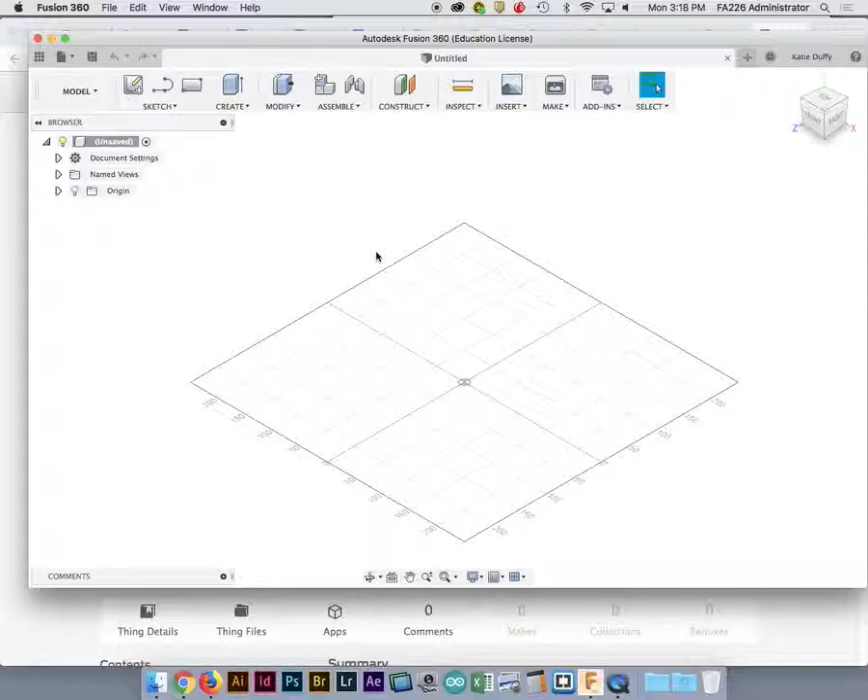So I think what I'm going to do is start off by making a box, and then I'm going to hollow it out. I'll start by making one solid box and using a plane cut to split it, just so I can show you all how to do that skill as well, okay?

So I'm just gonna go ahead and grab a box, all right? The only difference about yours is it's just gonna be a more elaborate shape, but then you're just gonna find a plane to put that hinge on. So I'm just gonna make mine, let's say like 100 millimeter by 100 by 100 for now, just to keep it easy.

Okay, and I'm going to change the material real quick, the appearance, just so I can see what I'm doing a little bit better. I usually will work with plastics. I don't like that one. Let's see. I don't like that. Opaque, that's what I want.

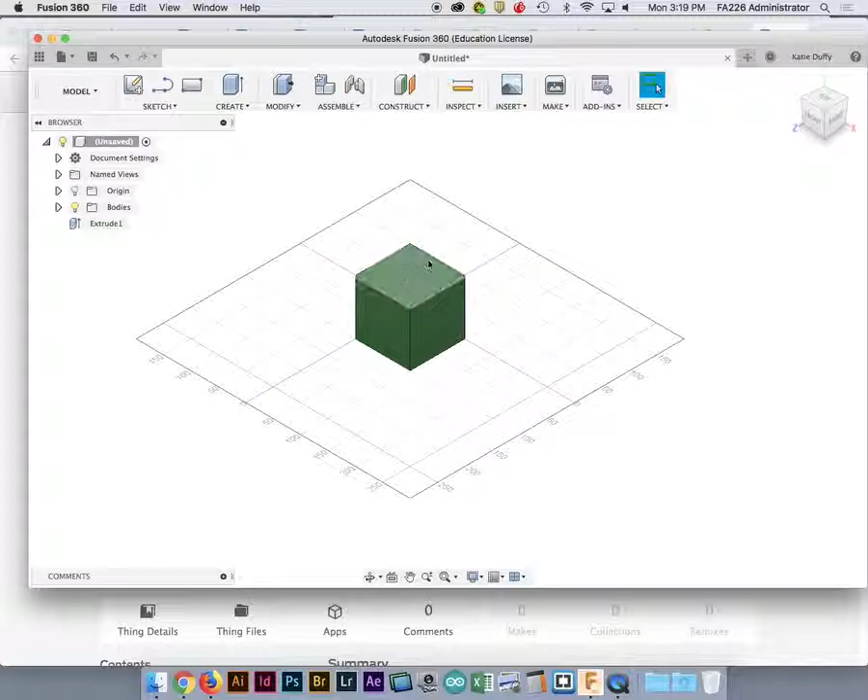Okay, cool. So instead of drawing another box that has the same X and Y dimensions and just a different Z, the other thing that I can do to show y'all this skill as well is I can actually use one of these planes to chop my form in half.

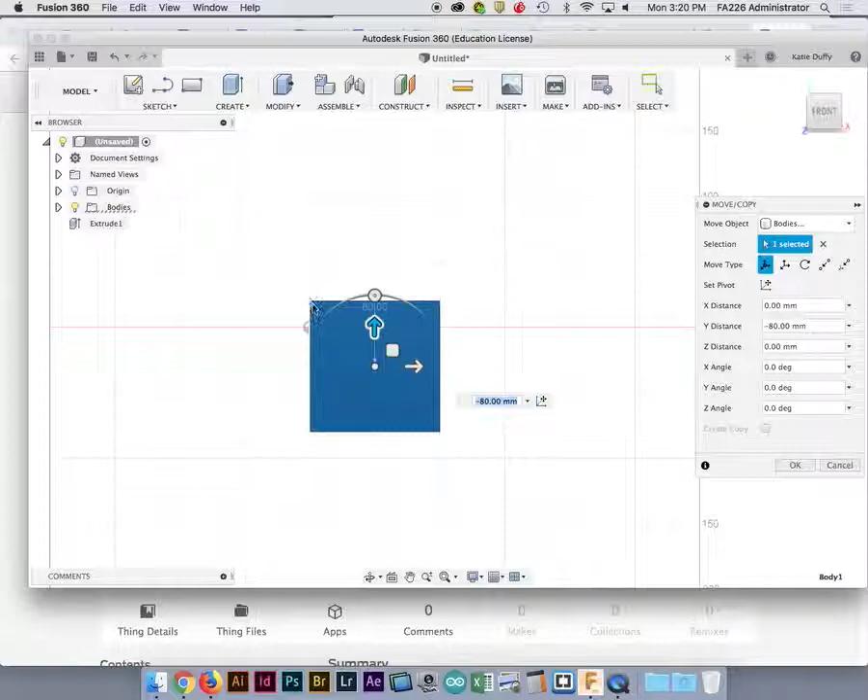So I'm going to use my move copy, and I'm just going to move this. This red line is going to be the X plane, okay? I'm going to move this down a bit so that I have about 20 millimeters from the plane to the top. So that means my top's going to be 20 millimeters. So I'll hit return and go back home. As you can see, my box is sort of intersecting this plane, okay?

And so what I'm going to do now is actually use that plane to chop this. So I am going to go to modify, and I'm going to go to split body. I'm going to select the body, then select my splitting tool, and select the tool that I want to work with. Unfortunately, I think I have to move this out of the way, so I'll just move this box a little bit out of the way.

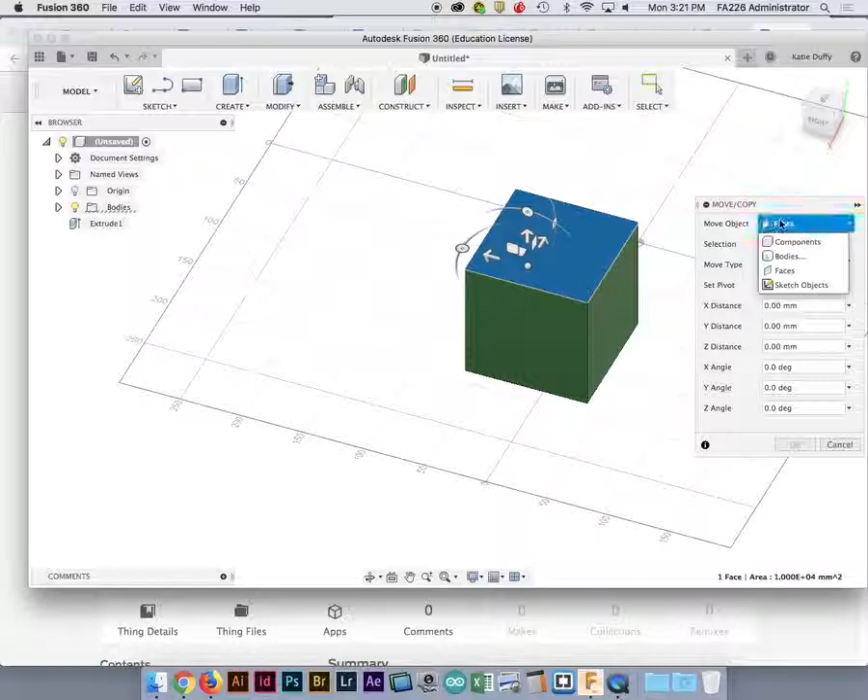All right, cool, so let's try that again. Modify, split body, select the body, grab my splitting tool, select my splitting tool, and check it out—it'll sort of assign a splitting tool right where that plane is. So now when I click OK, now I'm going to have two bodies. All right, so now I have my top and I have my bottom. Does that make sense to everybody?

Okay, so again, same thing—you could totally just draw two rectangles and that would be totally fine. But for y'all's, it might be an irregular shape, and it might be really hard for you to redraw the exact same top and a slightly different bottom. The plane cut will be a really good way for you to find a place to chop it to create a top and a bottom.

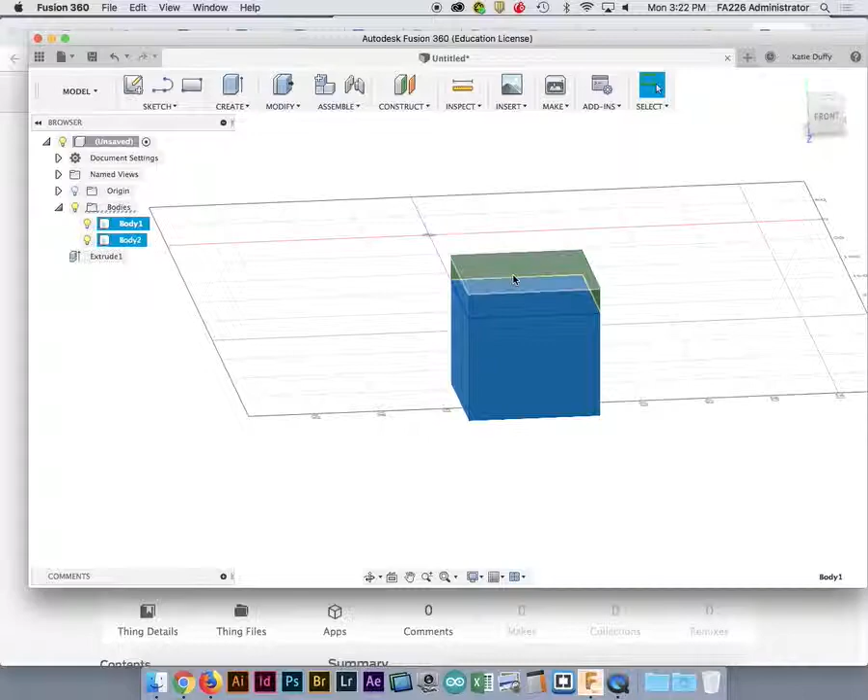So what I'll do now is just move both of them back up 80 millimeters, because I moved it down 80 millimeters before, just so it's sitting flat on the plane and I don't have to worry about it later. The next thing I like to do is start to move things around from the axis that they're going to be moved around in real life space, so I can start to understand how this object is going to interact together.

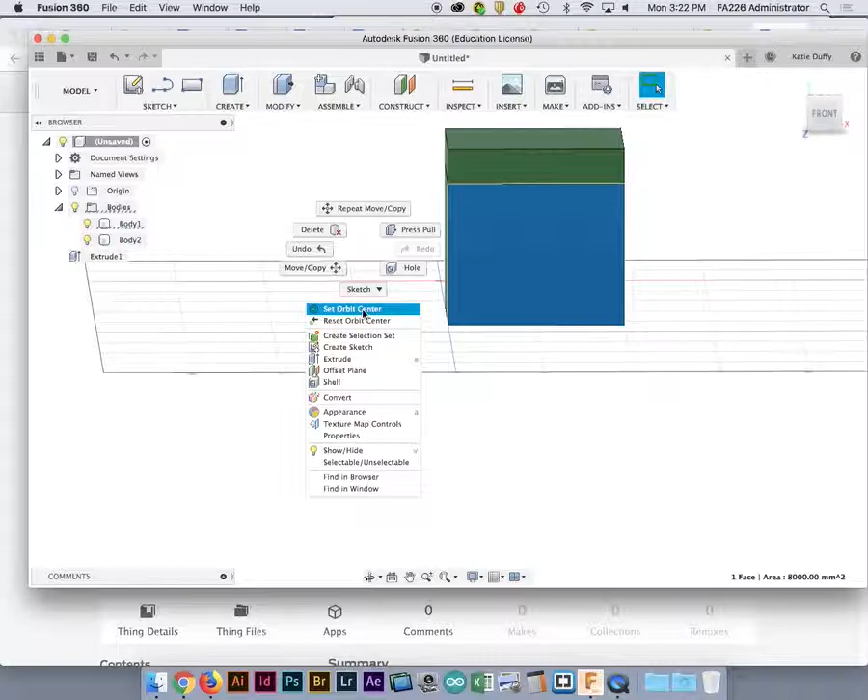Okay, so the way that I'm going to do that is I am going to grab my set orbit center. Remember we went over this? What I'm going to do is this is going to give me my orbit center, and I'm going to put it right at the corner of this top shape.

Okay, so that's going to be my orbit center now. So now when I move things around, it'll move around based on this. So the first thing I'll do is rotate this top just so I can understand exactly how things are going to be rotating.

Because you want to make sure that when you're rotating something, there's not a piece that gets in the way of it. If you have like a little piece sticking out here, it's not going to be able to flop all the way open.

So just to make sure we understand the basic mechanics, I'm going to go to Move Copy, and I'll grab my body. But what I'm going to do is make sure I select that corner, or better yet, this whole line here. Either one will totally work.

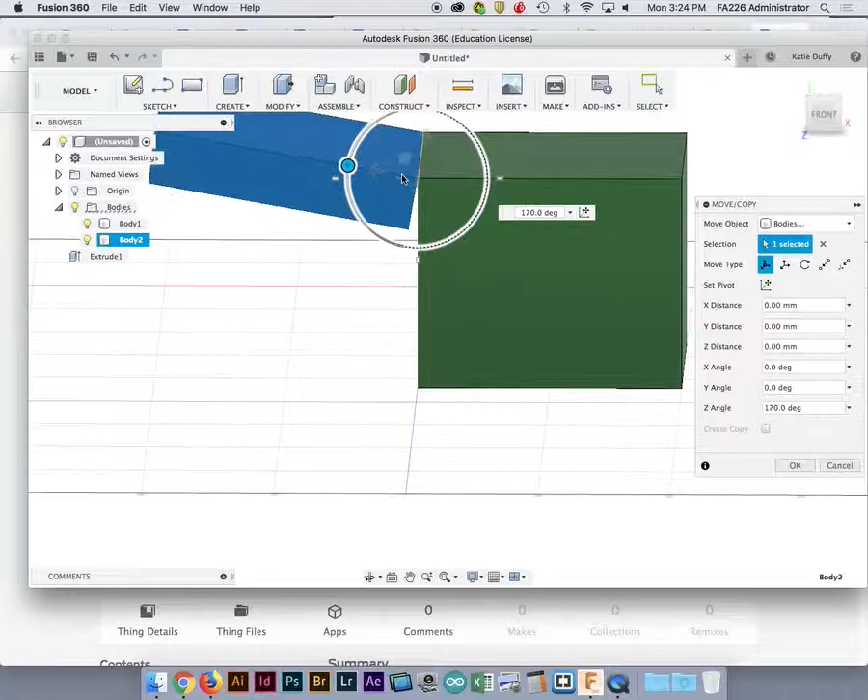So I'm going to select the corner of the top. And then when I move it around, I'll actually be able to see exactly how it's going to be rotating. So when I rotate it, it's going to be rotating from this axis, and it'll only be able to rotate 180 degrees, because if I go any farther than that, it's going to start to intersect the other space.

So let's say you want it to rotate, but you want it to flop all the way open for some reason, or you want it to flop open farther than 180. What can I do to this top to make it do that?

Yeah, absolutely. So I can go ahead and grab my fillet or chamfer, either one would work, and just pull this in a bit.

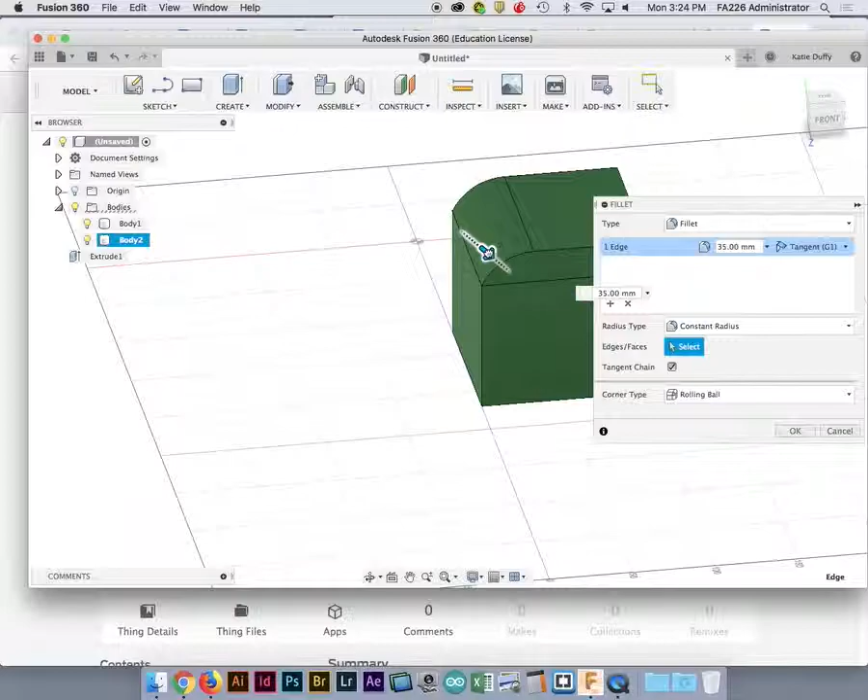And so then when I rotate it, and I can hide this real quick just so I can see a little better, then when I rotate this, I'll be able to go a little bit more. See that?

Everybody following me? Okay, so that's just your test, especially when you get to the point where you actually have the joint. You don't want to print until you've kind of moved things around and made sure they stay where they're supposed to go, and that anytime you get to a point where one body is sort of intersecting another body, just know that you can't do that in the IRL space, because we're going to be working with solid matter and not just math.

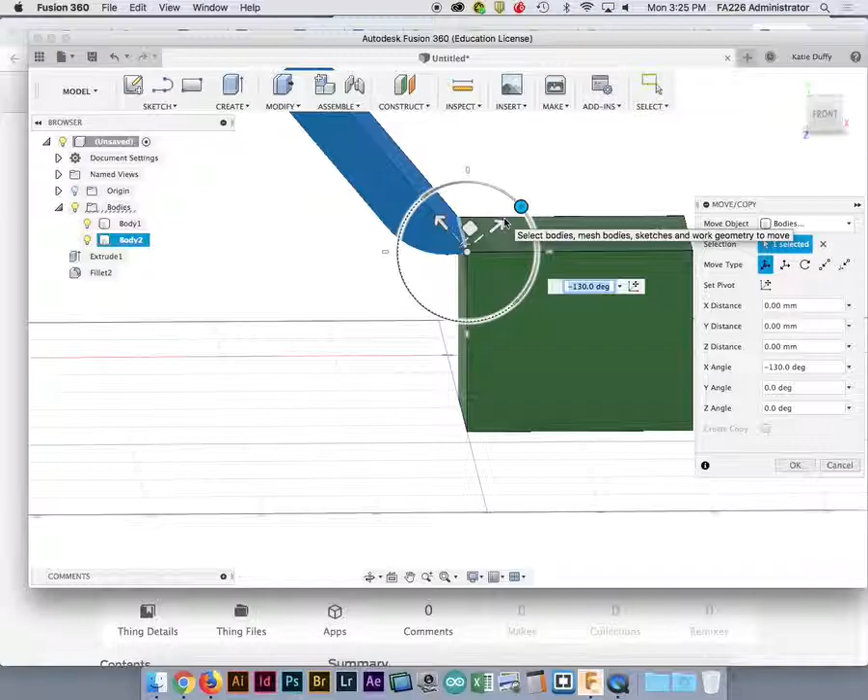Okay, so that's the first step, and I always like to do that. I'll just literally be in the computer and watch this move, just to try to understand the mechanics of it so that I can make a joint that will behave correctly with those really simple mechanics. Does that make sense to everyone?

All right, so I'm going to cancel this. This is going to be our main shape. So now what I'll do is I'll actually start to make the joint.

You could use the chamfer to start off with, or it might be a better idea to just maybe start off flat. I think for this tutorial I'll actually just start off here, and then I'll sort of change it as I go. So I know that I'm going to need to make a joint that sits off the back here.

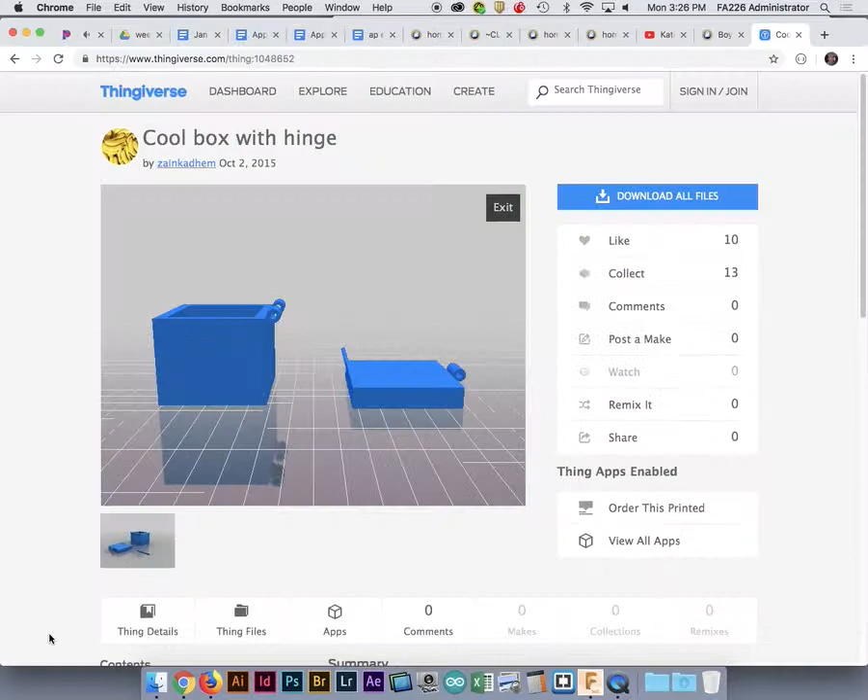So the first thing that I'm going to do is make a cylinder, and place it in between these two shapes. And before I do that, let's just take a look at the way that this is formulated, just one more time.

Okay, so if we take a look at this, notice how this kind of sits off just slightly, just a little bit off the back. It's not just totally connected to the back, it's just a little bit off. So we're going to do a similar thing. We'll make that piece first, and then we'll make everything kind of fit together.

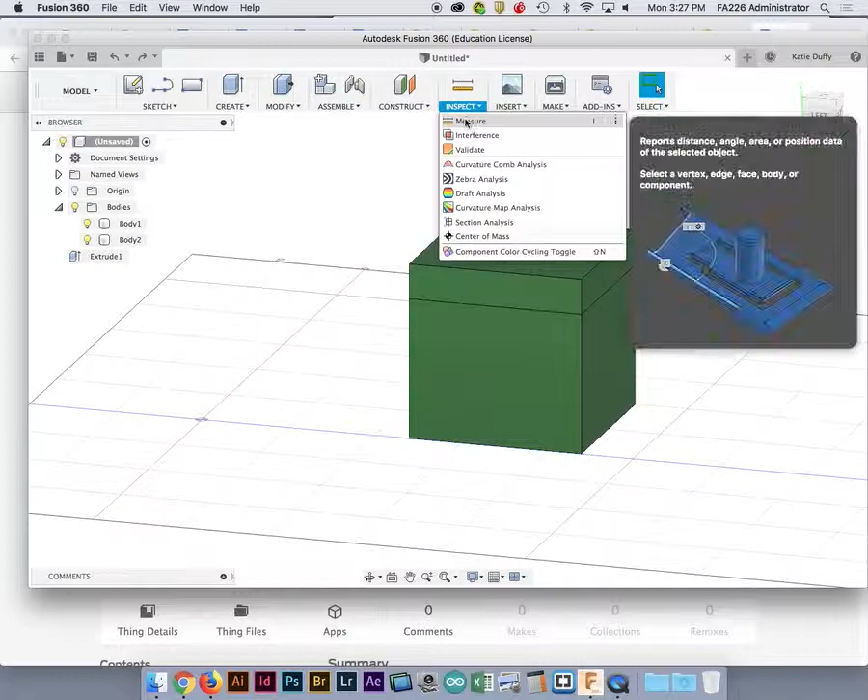So I'll go ahead and grab a cylinder. And before I do that, I'm just going to measure the size of this box because I don't remember what size it was. So I'll just go from here to here. All right, so 100 millimeters, I don't know why I couldn't remember that. So we'll do a cylinder.

And I'm going to make it... let's make it like 6 millimeters, actually let's make it a little wider, let's make it like 10. And we'll make it 100 millimeters tall. Okay, and then I'm going to change the appearance of this just so I can see what I'm doing a little better.

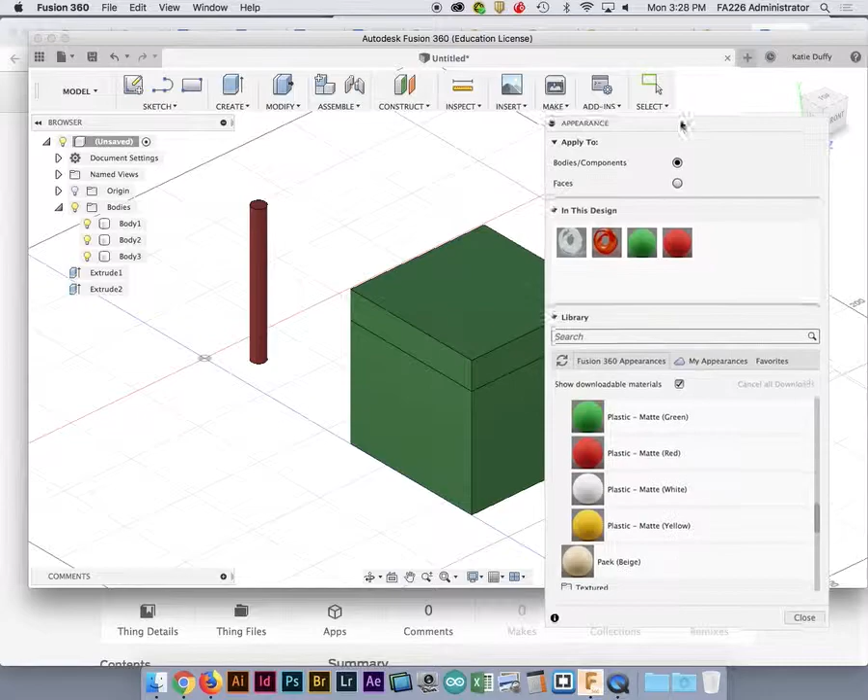Okay, I'm just gonna rotate this. Make sure it's on bodies. Okay, I'm just gonna get it mostly into position here.

I'm actually gonna do that again, because I want to make sure it's at a right angle before I start to rotate it. See how that's kind of wonky? It's not at the same right angle as the X, Y, Z axis.

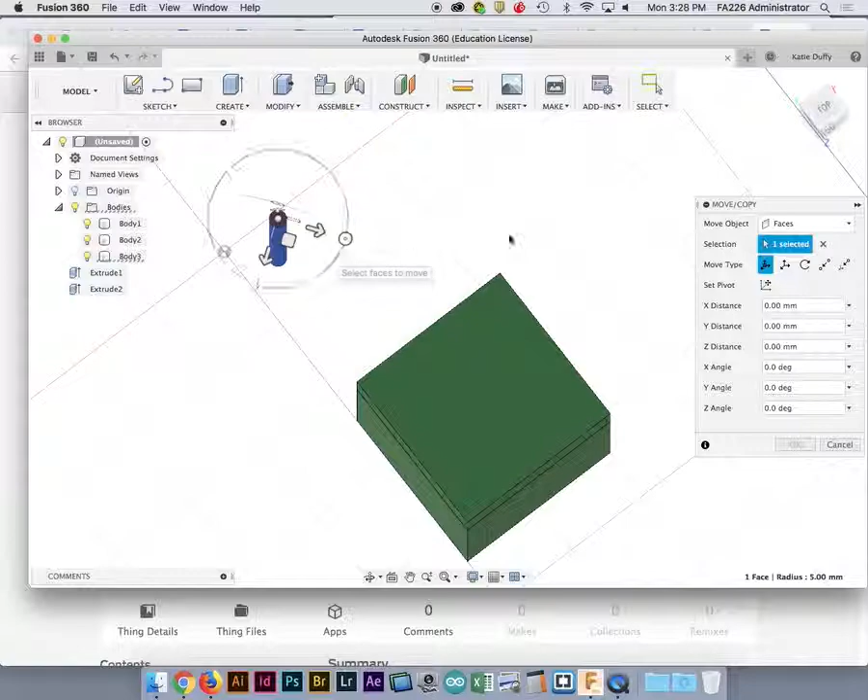So yeah, there we go. That's much better, that looks right. So I'll rotate this again, go 90 here, and then I'll just drag it into place. I'll go from the top.

Okay, and it doesn't have to be perfect because I'm probably not going to end up using the whole thing anyways. I'm probably just going to only use little pieces of it, and we can always align it later.

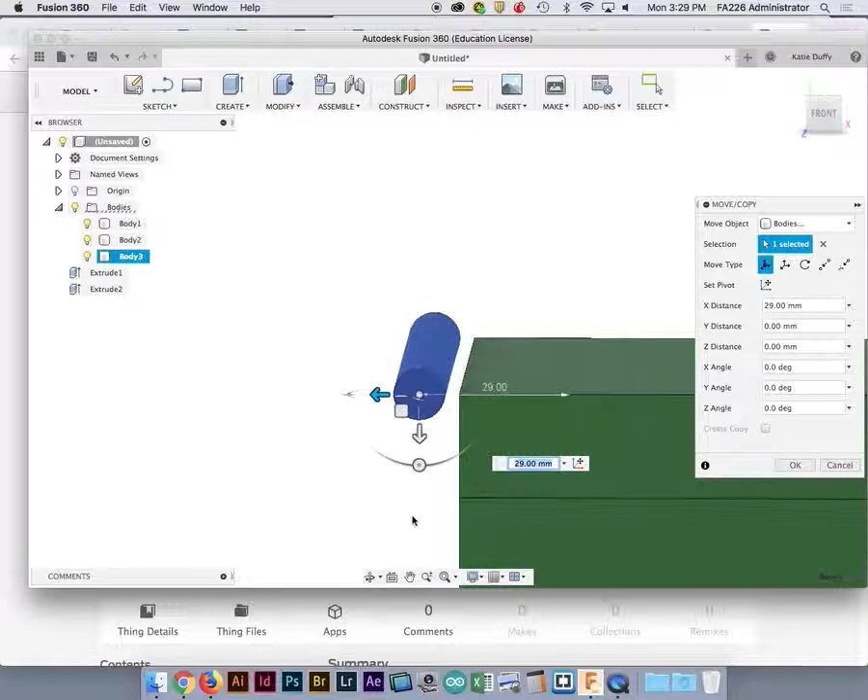So I'll put this here, and I'm going to offset it from the box just a little bit, maybe even a little less than this, just so I can have that little bit of space. I'm going to put it right in between the two pieces. I may need to adjust this later, but I think this is a really great place to start.

Okay, so we know that we're going to need a hole in here, right? Does anybody remember what size you should make your walls? Yeah, 3 millimeters. You might be able to get away with like 2 millimeters sometimes, but 3 is your general - anything you want to be able to hold weight, especially a hinge, should be at least 3 millimeters.

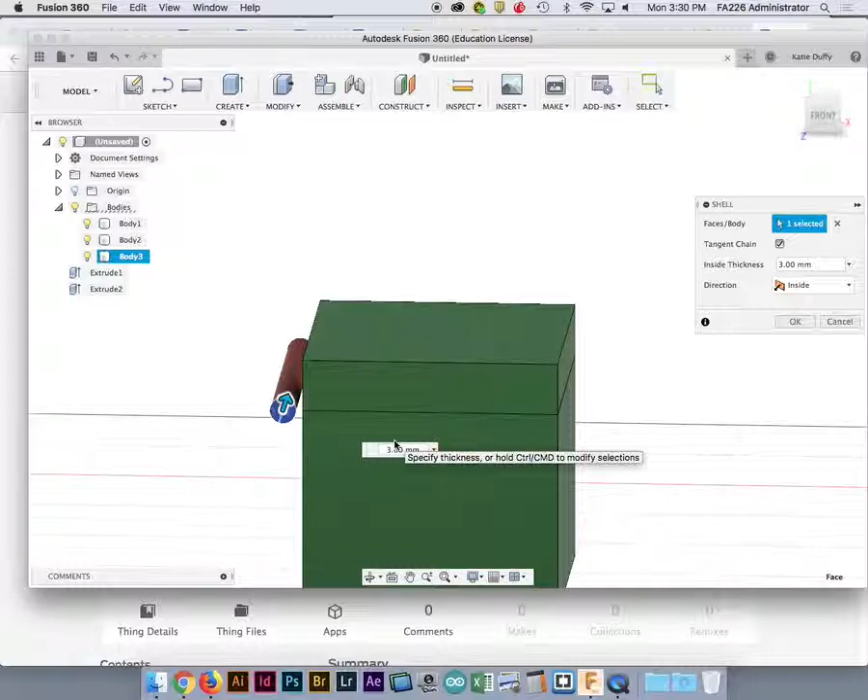So what I'm going to do is go to modify, and I'll use the shell command. Click here, and I'll put 3 millimeters in here. Okay, so that should give me a hole that goes all the way through. Let's try that one more time.

Try the same thing here. Okay, I don't know why this is mad at me. There's another way that we can do this, so we'll just hold off on this for just a minute, okay?

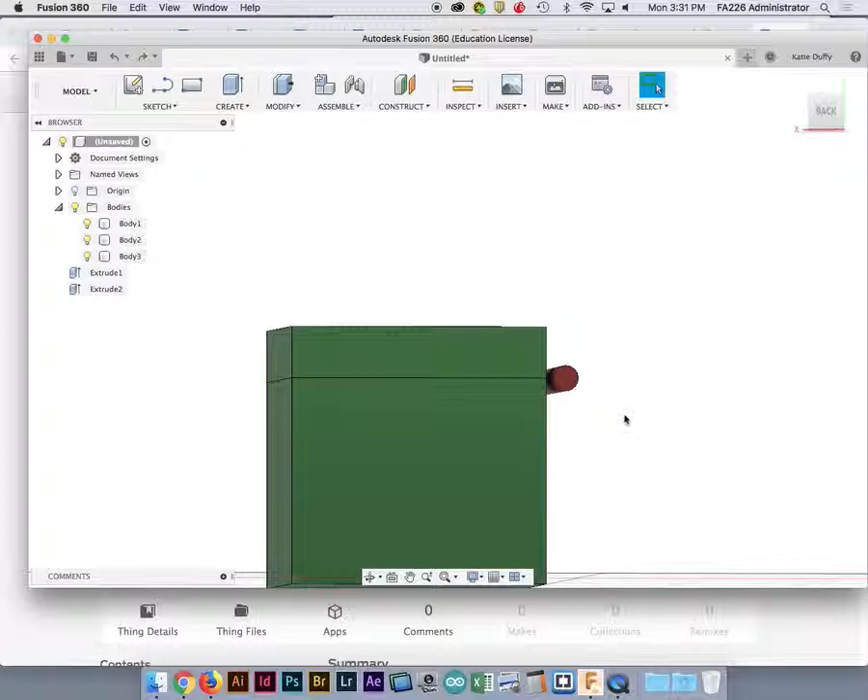So what we're gonna do now is let's go ahead and make the supports that are gonna hold this in place. So I think the first thing we'll do is make a bar, like a little rectangle that goes from the bottom of this shape to this shape. That's just gonna hold it in place. So I'll go ahead and make that now.

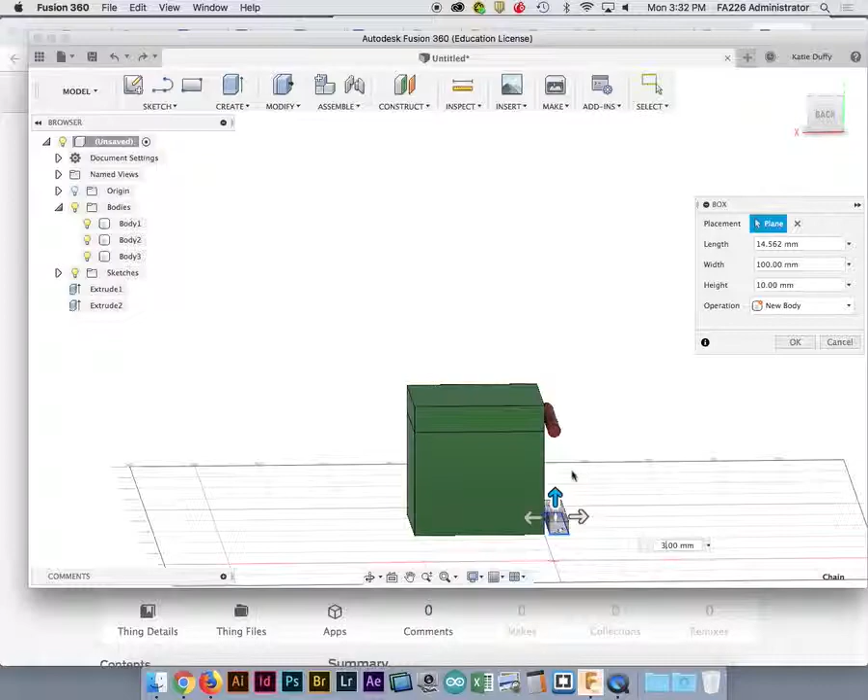So I'll go ahead and grab my box. You can probably use a cylinder if you want to. And I know it's going to be 100 millimeters long. Okay, and I'm going to make it 3 millimeters because I just want it to be a connection piece.

And the width of it doesn't really matter so much because I'm going to put it inside the box anyways. So now what I'll do is move this up to where it's touching the start of my joint.

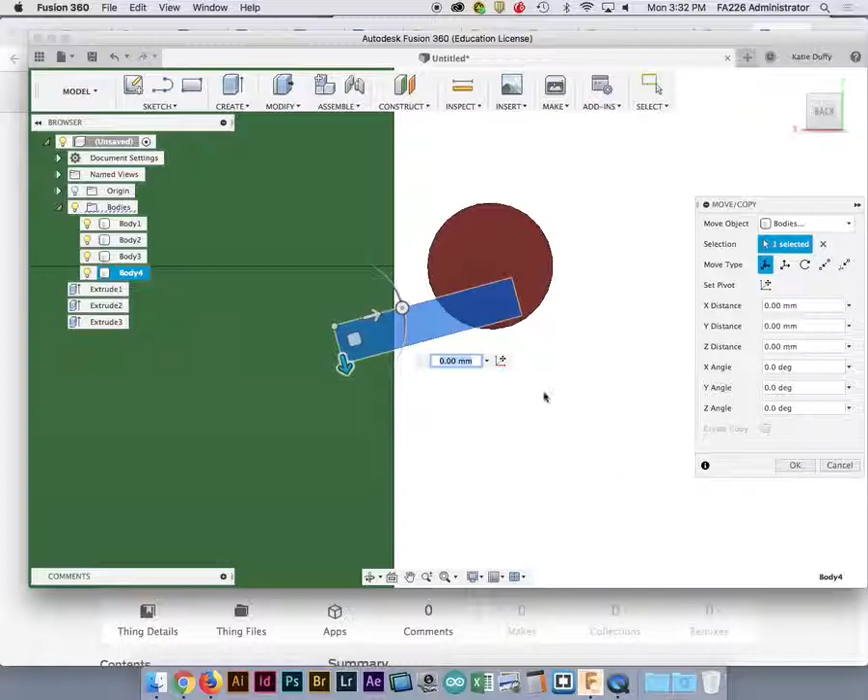And if you want, like the other one that we saw, you could put maybe a little bit of rotation on it if you want to be a fancy person. I encourage you to do so. We'll just move this over a little bit. Okay, cool, so we'll leave that there.

Again, we can adjust all this later. And like I said, we're probably going to use small parts of this, so the alignment doesn't really matter so much right now. Okay, so what we're going to need next is we're going to need to figure out how we're actually going to attach this part to what we have here, okay? And in order to do that, we're gonna need our hole, right?

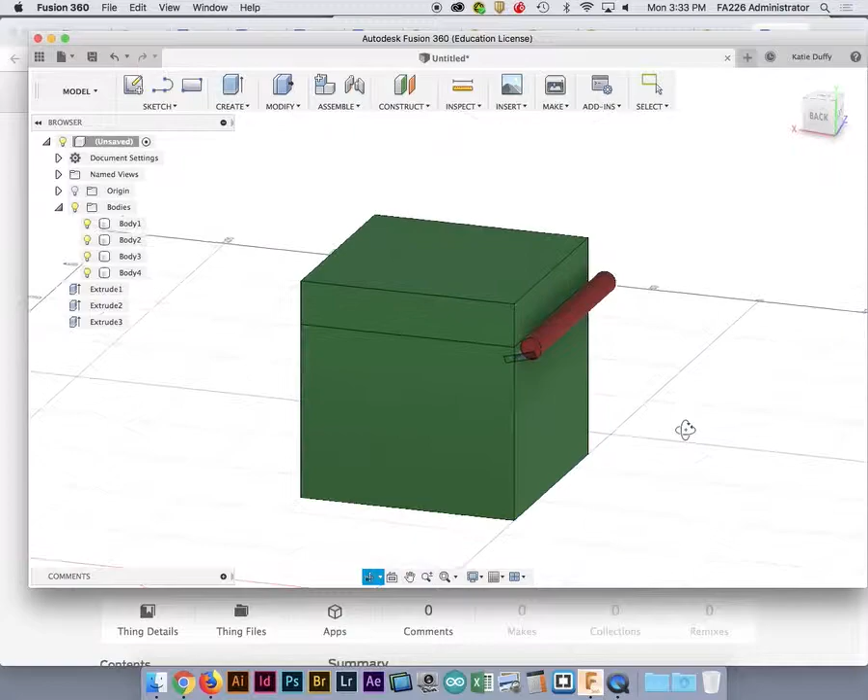So we know we're gonna need a stick, right? We're using that stick approach, y'all remember that, okay? So what we're gonna do first is I'm going to make that stick, that's gonna kind of be like the screw or the pin that you would put through the joint. I'm gonna make that 3 millimeters, and for now I'm going to make it 100 millimeters tall.

Then I'm also going to create another one, and this one I'm going to make 0.5 millimeters bigger, okay? Because I'm going to use this one as a hole. In general, a hole needs to be 1 millimeter bigger than whatever is going into it, okay? So 3 millimeters as a supporting piece, 1 millimeter for a hole. The reason I'm going to make this cylinder 0.5 millimeters bigger is because it's going to expand 0.5 on all sides, meaning it's going to be 1 millimeter bigger. Does that make sense to everybody? Right?

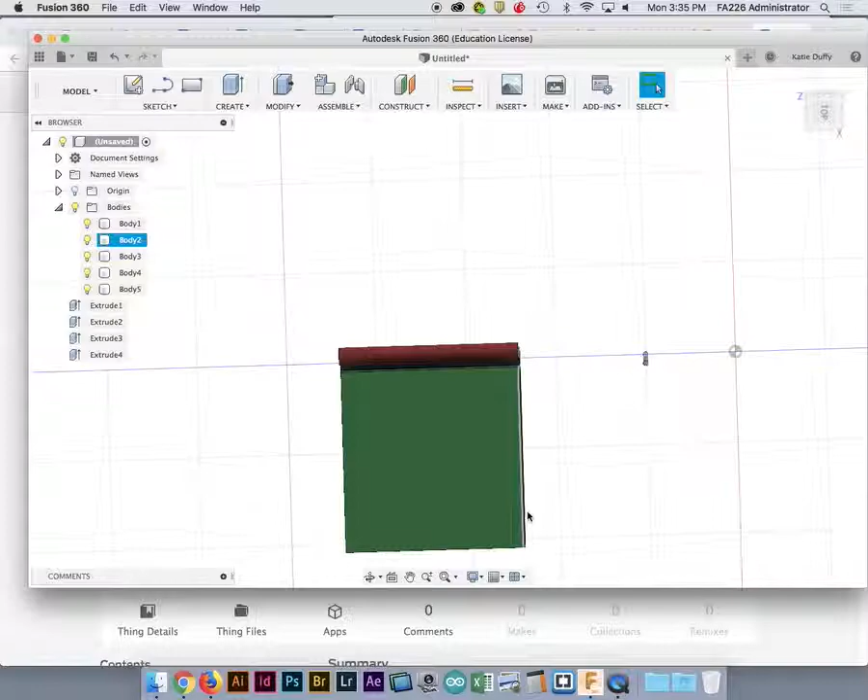When in doubt, if you're like, maybe that's cutting it too close, just do 1 millimeter bigger. It doesn't have to be perfect engineering, because the 3D print is a little forgiving. Keep in mind, if you make something a little too big or too small, we have 3D pens and a lot of sandpaper, so you can always fix mistakes, truly.

So just to simplify this a little bit, let's grab our cylinder again, and let's make it 4 millimeters by 100. This one is what I'm going to use to punch the hole through this joint here.

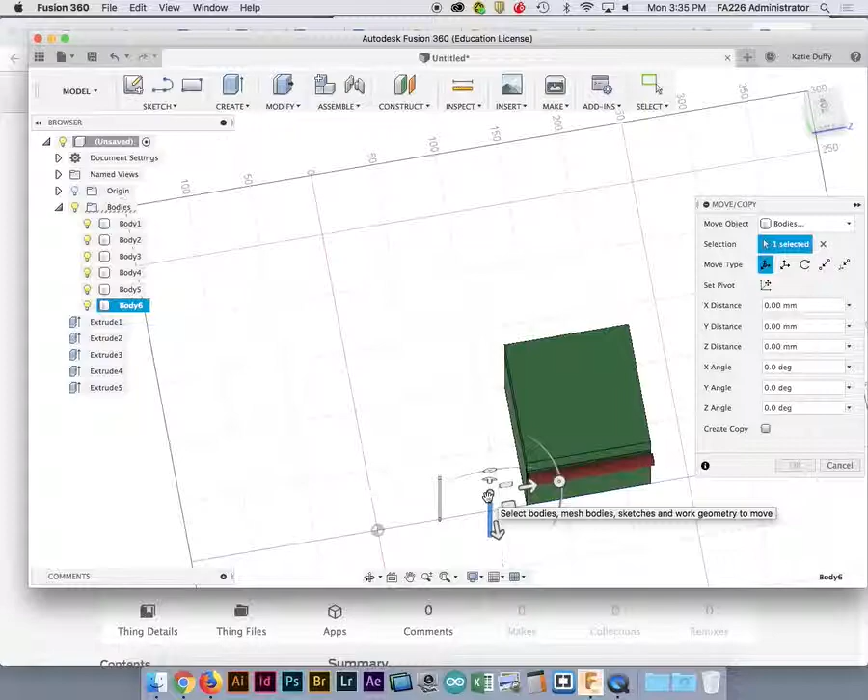So I'm going to go ahead and rotate this. Again, you just want to make sure that the XYZ is at the same orientation of your plane, so that you don't get some kind of wonky rotation, because it's really easy to misrotate something. So, this here, and then I'll move it in place this way, just roughly.

And then for this one, I am going to use my alignment tools. I'm going to go to modify, go to align, and I'll say from the center of this object to the center of this object, and that will align things perfectly for me. So I'll click OK.

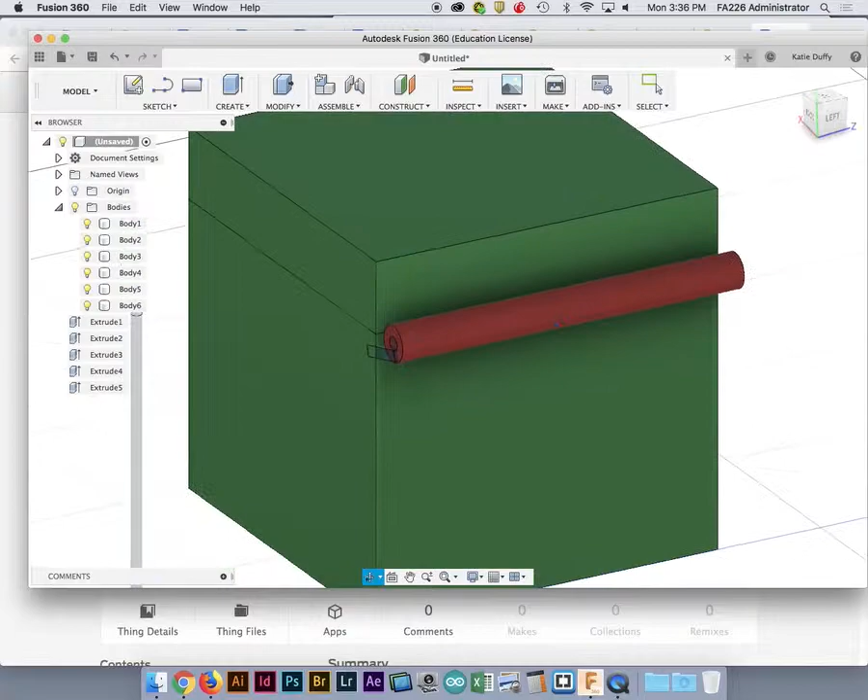Then what I'm going to want to do is come over here, modify, and do combine. Remember, combine has a bunch of different functions inside of it. We're going to use the whole command. If you want to keep your cutting tool, instead of join, do cut, select this, select your tool body, and just say keep tools. So I'll click OK.

What just happened? Did I click a button on this tablet? Oh my god, what is that? What kind of matrix situation am I in right now? Precision mode. I hate it. Oh my god, I'm like a grandma. No shade to grandmas. Oh my god, okay, we made it. Stop, I'm not clicking anything, please stop. I think your wrist is hitting your mouse, or your forearm. Oh my goodness, truly, y'all. I swear I'm not touching anything. I mean, now I am. Okay, Jesus Christ, okay, we made it.

So I'm going to go ahead and find this body that I just created, this Body6 one, and I'll just turn it off for now. So now check it out, I have that hole there, and I'm good to go.

We won't worry about this for right now because obviously I would want to kind of punch the inside of this part out. But let's just wait to make sure that what we're doing is going to connect to everything correctly. Does that make sense to everybody?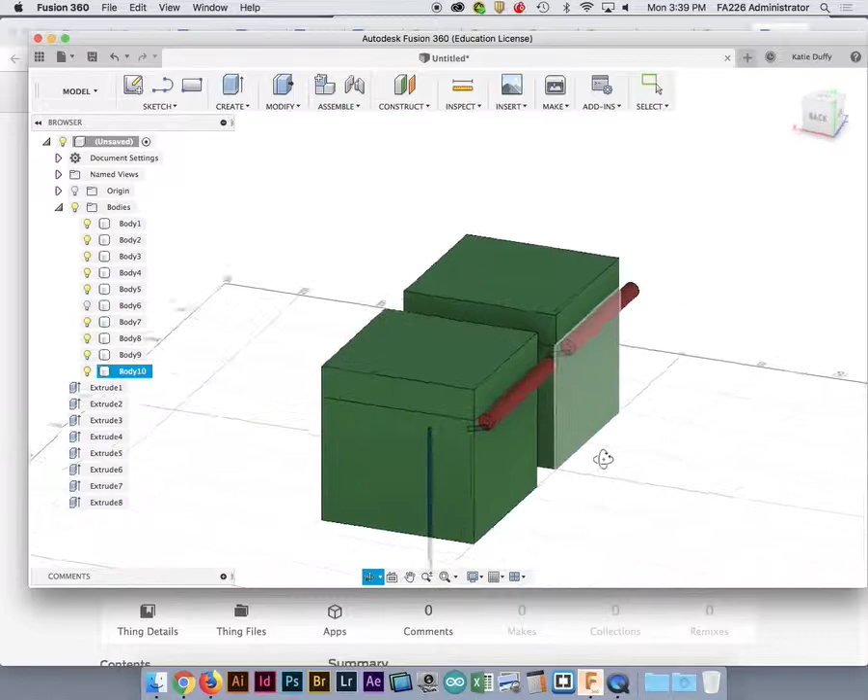So I'm going to move this over here, and this is going to allow me, this one I'll focus on the bottom, and this one I'll focus on the top. So what we want to do now is figure out how we're going to connect the top to this part. We may end up making another copy if we make changes to this, which is totally part of the process.

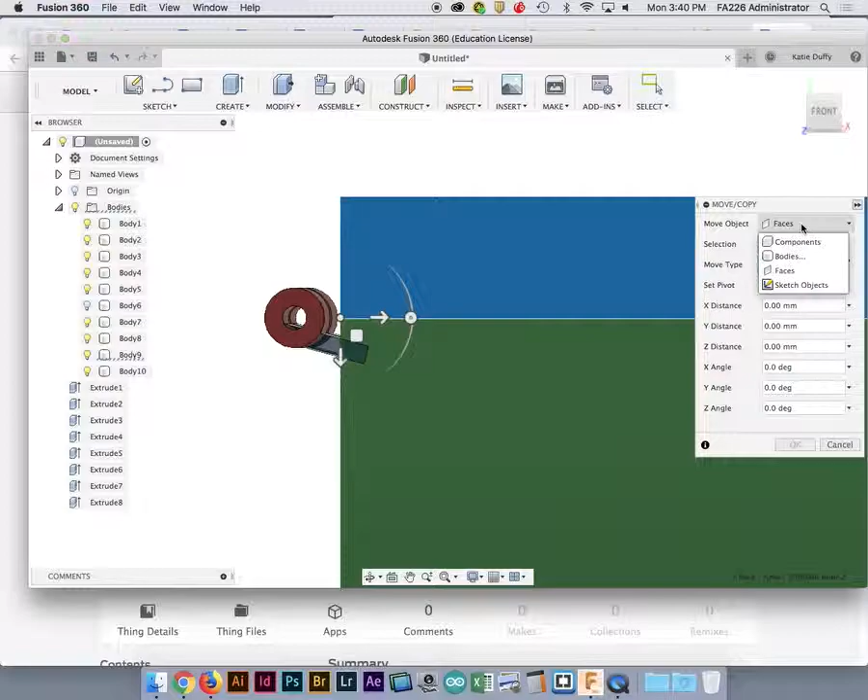So let's go ahead and rotate this one more time and just see how it behaves. I'm just going to grab the corner of this piece and check out how it behaves. Whoops, I want a body, thank you. Okay, so if I keep this where it is, I'm only going to be able to move it this much. So, any suggestions on what I should do?

So if I have this where it's at, and if I have my little joint that comes in here, the only way that I'm going to be able to work with this is it's only going to be able to move this much, right? So does anybody have any suggestions on what I could do?

I can round the bottom. What else can I do? Yeah, I can round the top. I can maybe move this whole thing down.

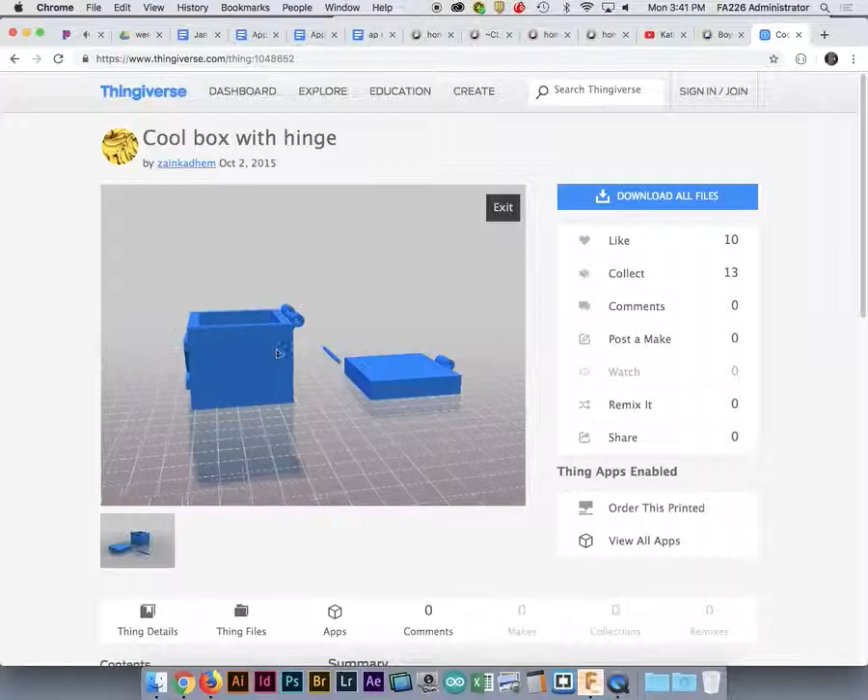But let's take a look at our example over here and see how they're doing it. All right, so what is happening in this example is that they actually have the joint on the top instead of the bottom. See that? So it's rotating from the top, not the bottom. Does that make sense to everybody?

So you can kind of put your joint wherever you want, all right? But if I'm going to try to do it in this iteration right now, I'm going to run into some major problems, right? So let's hit cancel.

And what I'm going to do is I'm going to take these two pieces, I'm going to move them out, and I'm going to move them up, okay?

So I'll grab both of these. I'll do this one first so that I can get the center point, and then this one. I'm going to move it out a little bit, and I'm going to move it up. So I'm going to put this actually right at the corner. Doesn't have to be super perfect, but it should be as close as possible.

And so now what I'm going to do is I'm going to create a connection point for the top. I'm going to hide this stuff here, so I'll hide this whole one. And I can always make another copy, right?

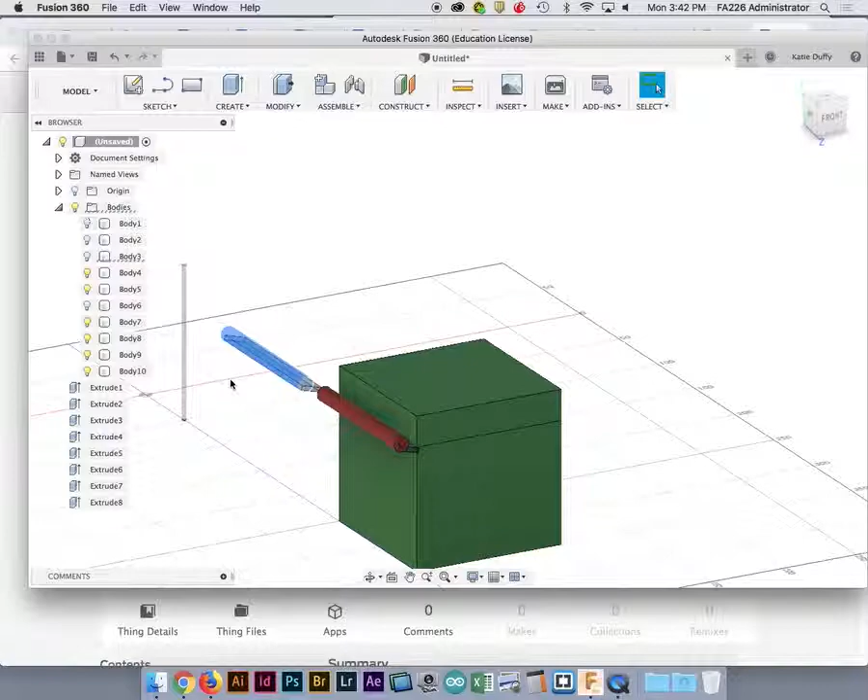Okay, so now what I'll do is I'm going to grab this piece and I'm going to make a copy of it. And I'm going to have this piece connect here, okay? And then what I'll try to do is I'll try to rotate it and see if I can get it to work the way that I want it to work, okay?

So I'll go ahead and do a move copy on this one. And I want to select this body in a way that allows me to... if I select the middle point, see how my direction arrows still say the right angle XYZ, right? Because if I select it here, it's going to go at an angle. So just watch when you're moving things. It's a really important thing to keep in mind.

So I'll do my create copy. I'm going to move this up, and then I'm going to rotate it. I'm going to move it over just a bit. Maybe down just a bit.

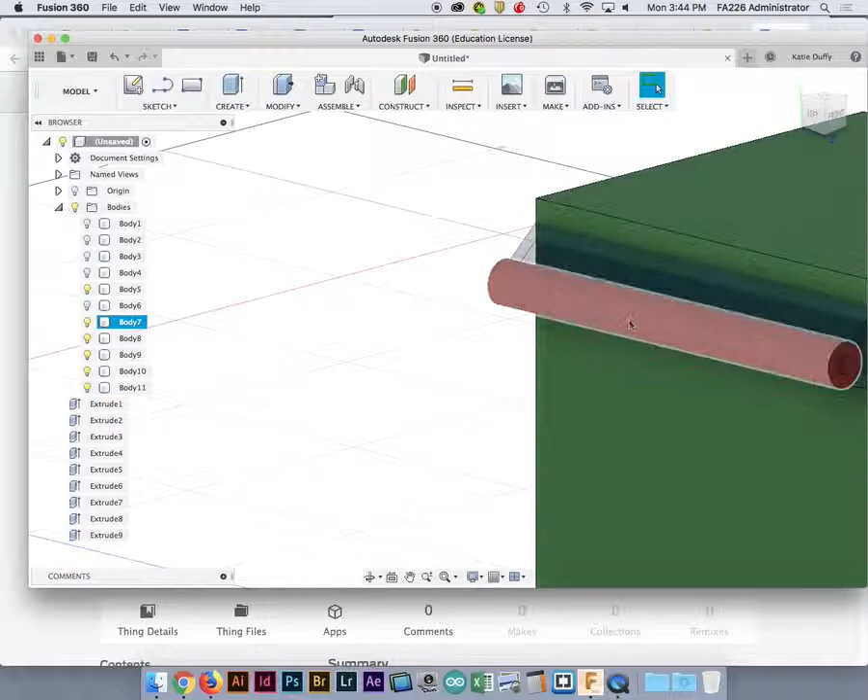All right, so what I'm going to do to this joint is I'm actually going to kind of break it up. So I'm going to cut slices out of it so that one slice will go to the top and two other outside slices will go to the bottom, okay? But before I do that, what I want to test is that everything's going to move the way that I want it to, all right?

So at this point, I'll go ahead and I'll make another copy, and I'm going to put the copy right next to it, and I'm going to move it from this angle so that I can see how it's behaving exactly from this angle, okay? So I'm going to select everything here. We'll do bodies, select everything. And I'm just going to do my move copy.

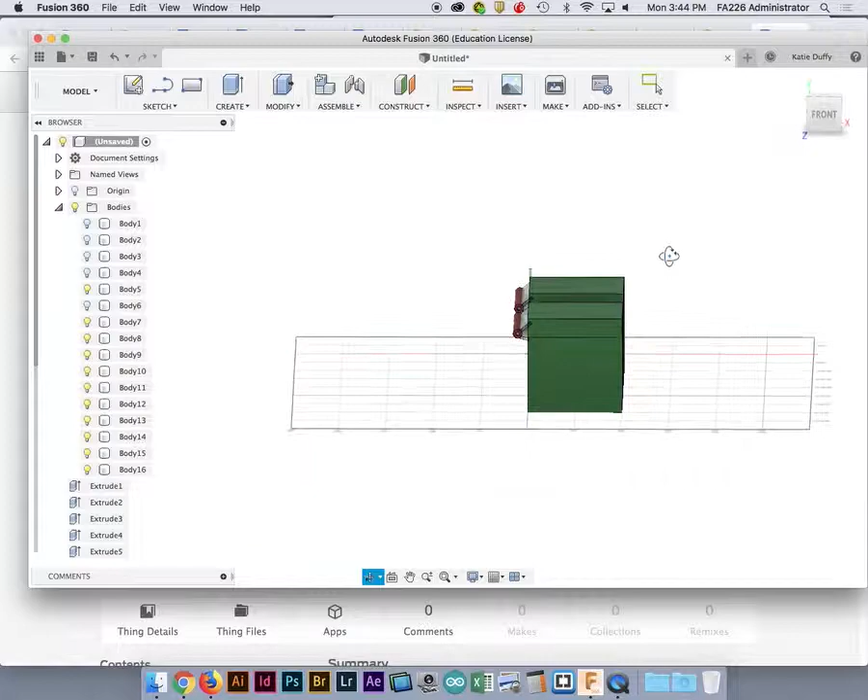Okay, and so what I want to do is I want to move these two pieces around—actually, I want to move these three pieces around. So everything from the top and everything from the bottom. And I will hide the bottom on this one and this part, and I'll hide the top parts on this one. All right, so when I look at it from this side, it's going to look like it's together, right?

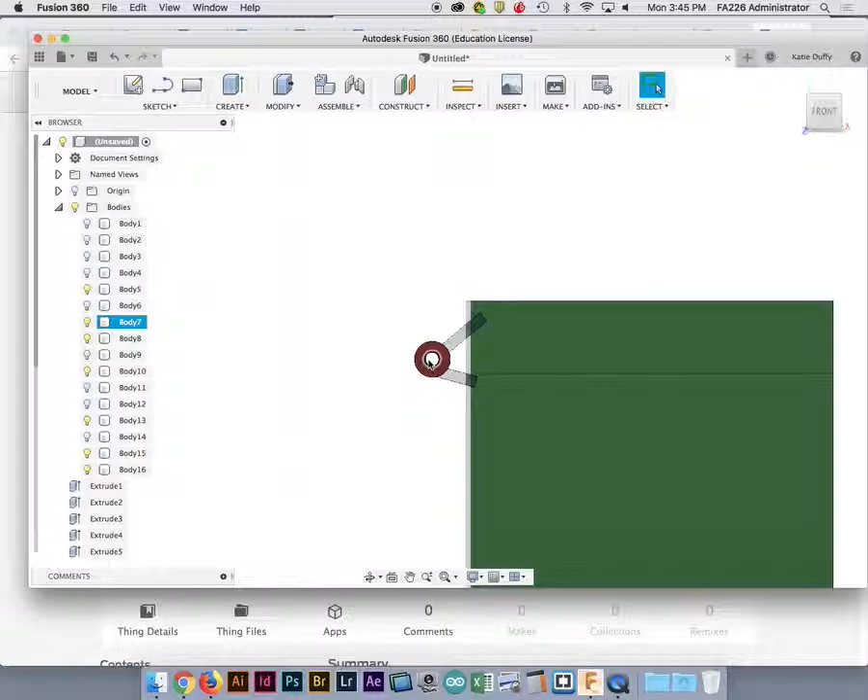So what I want is I want to make sure that this circle stays exactly where it is when I rotate it. And then I want to test how far this box is going to be able to flap open, okay? So I'm actually going to rotate from the circle. So I'm going to flip around here, and I'm going to go to this side. I'll hide this too. I'm going to name this stick so that I know where it is when I need it.

Okay, so I'll go from over here, zoom in a little bit, and now I'll use my move copy tool. So I'm going to make sure it's selecting the center of this, and then I'll just select these other pieces as well. So check it out—when I move this, I'll be able to open this all the way.

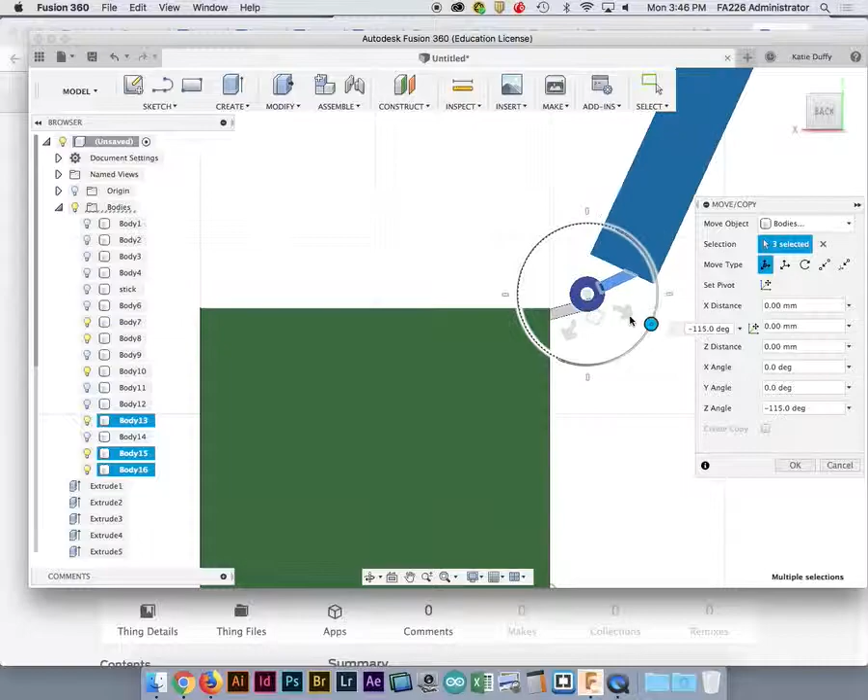Okay, y'all following me? Does that make sense? So it's looking like I could actually move this whole thing in, right? I probably overcompensated for that space that it needs to have.

So from here, what I can do is grab all these pieces. I'll select this one first, do my move copy. I'll select this one first again, so I can get that appropriate XYZ coordinate.

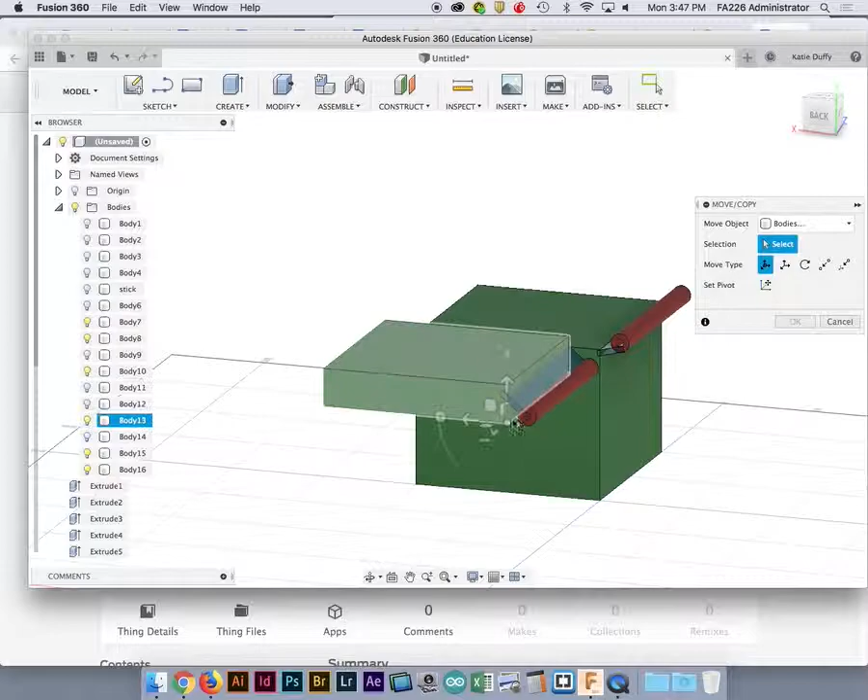I'm just going to select all of these and move them in all the same, maybe like 5 millimeters. That's a little too much. Okay.

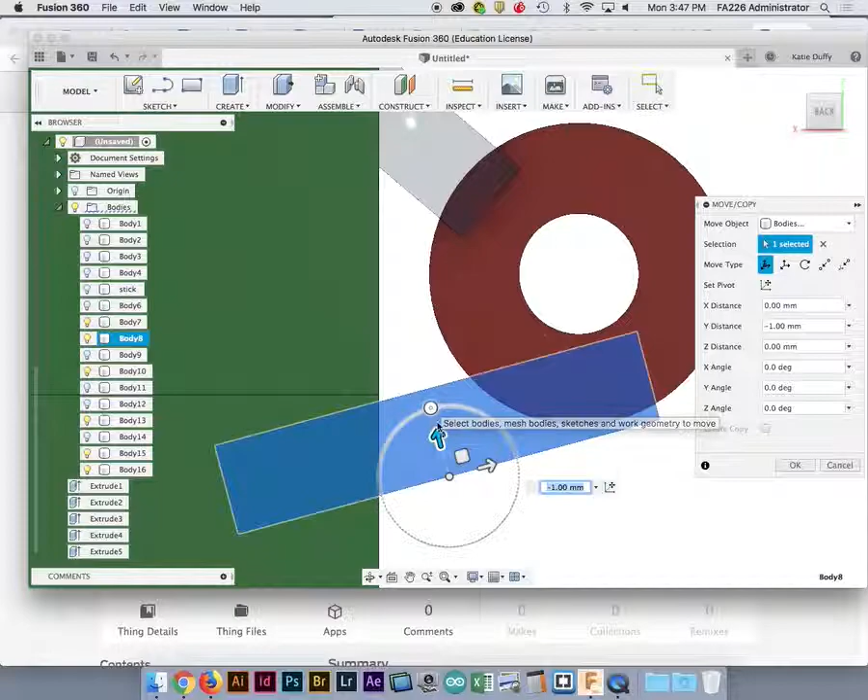And then I think what I'll do is move this one down a little bit. This isn't going to be the most elegant joint, but for this tutorial I think it'll be just fine. I'll try not to be that much of a raging perfectionist. Okay, I think that looks pretty good.

Now let's test that again and make sure that still gives us enough clearance. I'm going to select this first because that's the center point I want to rotate it at. And then my other two pieces, and then I'll rotate this.

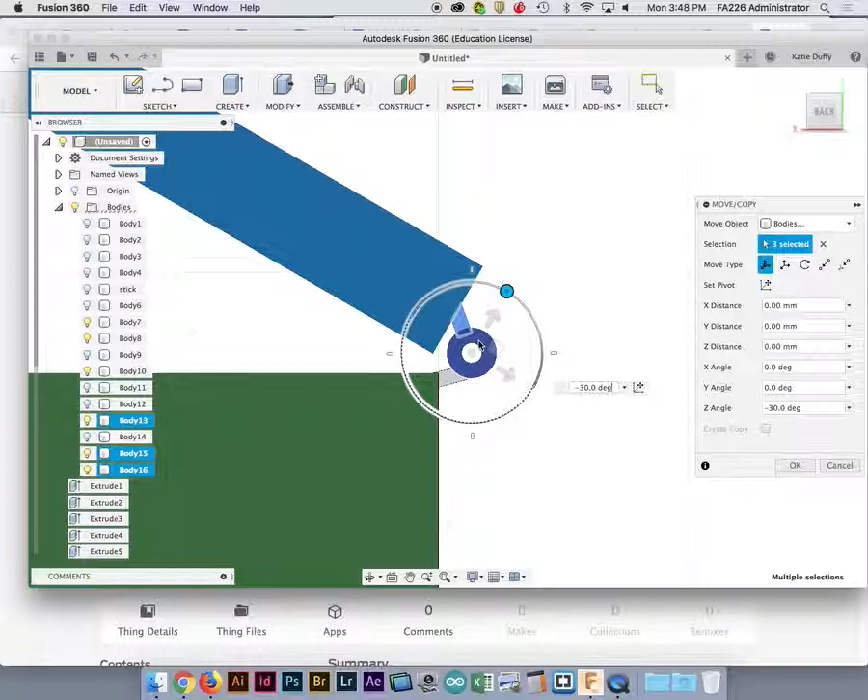Okay, so still looking pretty good. Other things you can do—again this is just a really quick tutorial—to increase the stability of this: if you're worried about this being strong enough, you can press pull these pieces.

Maybe a little bit, just to make this a little stronger if you wanted to. Just make that a little bit thicker. So those are all little subtle things that will increase the stability of your pieces.

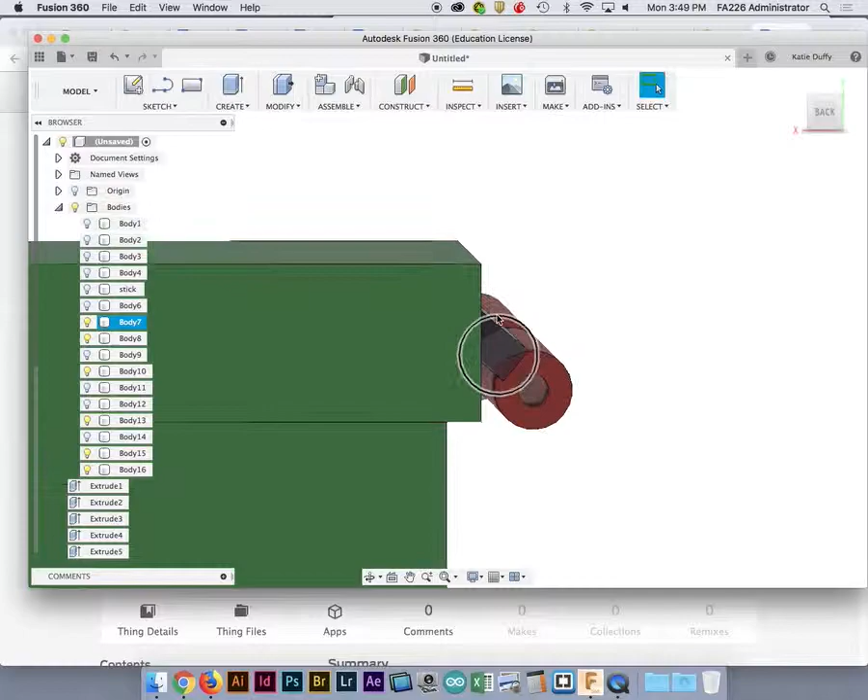Once you figure out this is enough clearance, it'll work, it'll open, the rotation's correct—does that make sense to everybody? Okay, so how we're going to finish this up: the last thing we're going to do is combine everything.

I would highly recommend—I can't tell you how many times I've combined something and then been like, shit. So before you combine things, just make a copy of the whole thing. Select all the bodies you're working with and make a copy of everything.

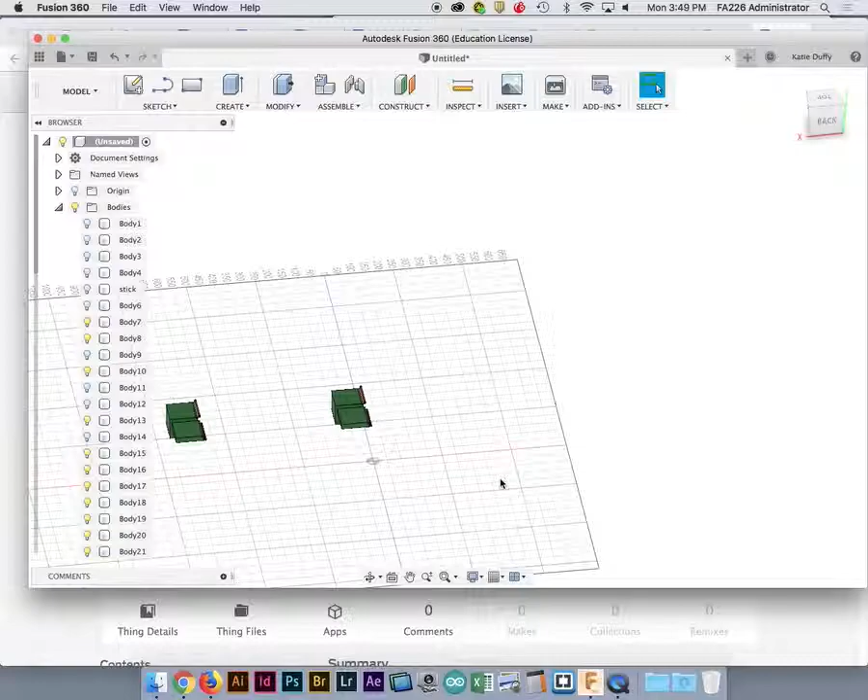Just put it somewhere that you don't have to look at it, so it's there. That way if you do need to go back or want to make a change, you don't have to start from scratch.

So what we'll do on this one we're working with is just combine everything. I'll go ahead and do my modify, combine, and I'm not going to keep the tools for this one because I made a copy just in case I need it. So I'm just going to go to join.

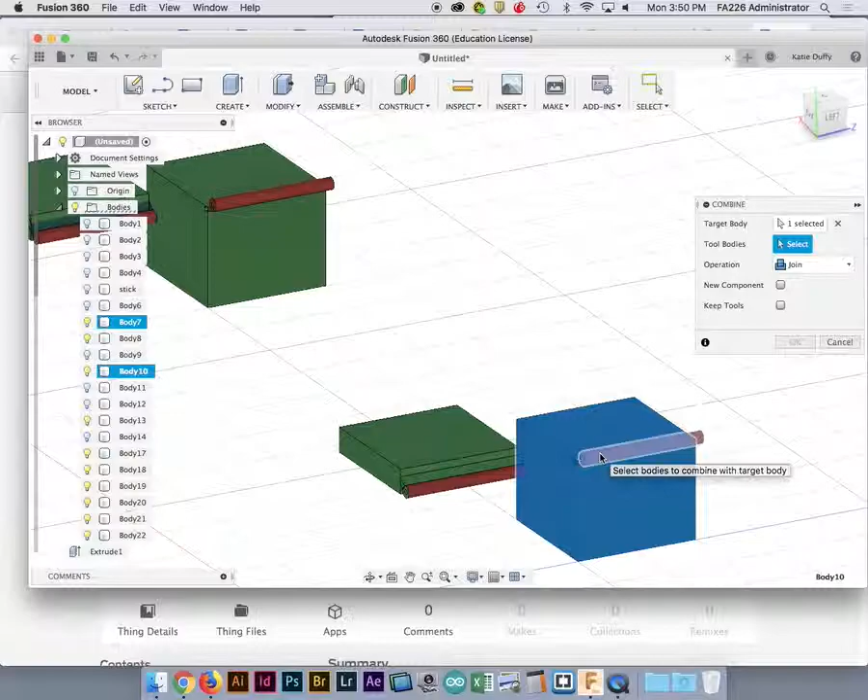I'm going to join all of these. And then I'm also going to join these here. Okay, so this should be one solid body.

So I'm going to rename this one bottom, and make sure that this is one solid body, because sometimes you forget something, you know. And I'm going to name this one top.

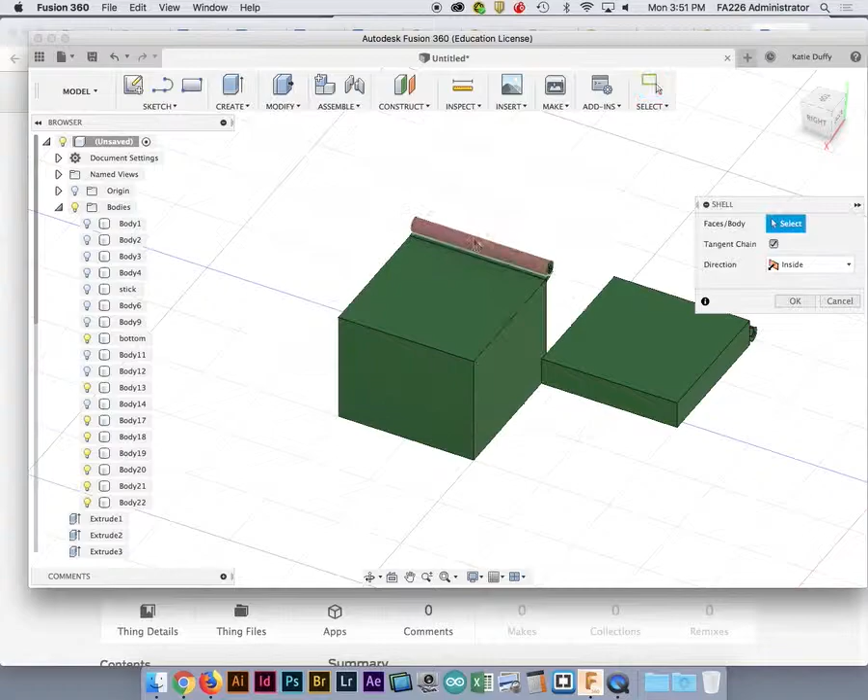So the last thing I'm going to do—obviously again this is just a really quick tutorial—I'm assuming these are going to be shelled out. You can shell these out maybe before you do all this. Y'all will probably already have that done, because you've already made your boxes.

Y'all following me? Okay, so what we're going to do is align these two so that they sit perfectly on top of each other. And then we're just going to use some cutting tools to cut out the opposites so that they'll fit together perfectly. So let me show you what I mean by that, and then we'll be done with this tutorial.

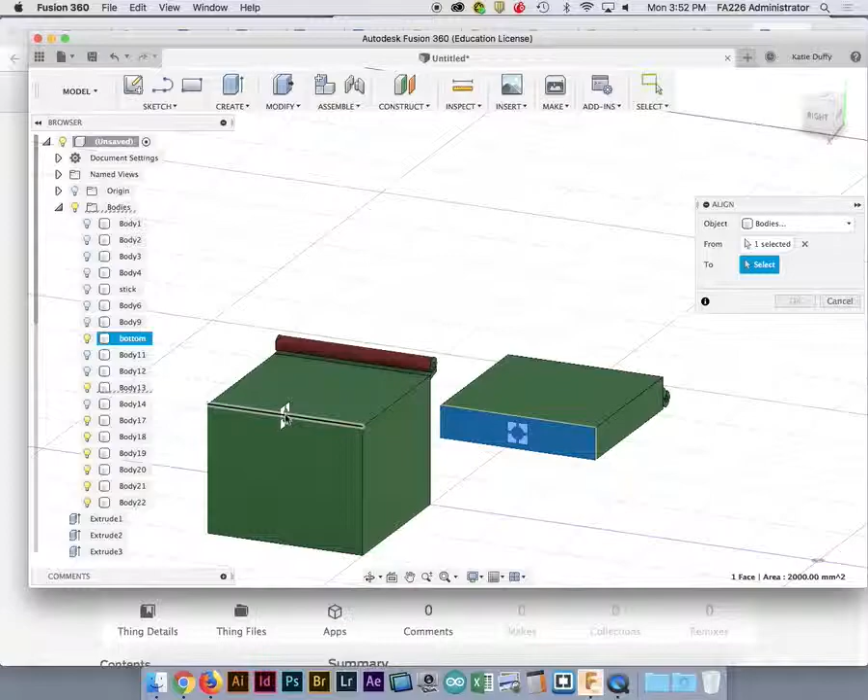So I'm just going to do my align. I'm going to go from here to here. Okay, and that should align them perfectly for me. Awesome.

Okay, so now I have the top and the bottom, they're aligned. Obviously there's a piece that's overlapping. That's fine for now, because what we're going to do is punch certain pieces out of the top and then punch other pieces out of the bottom.

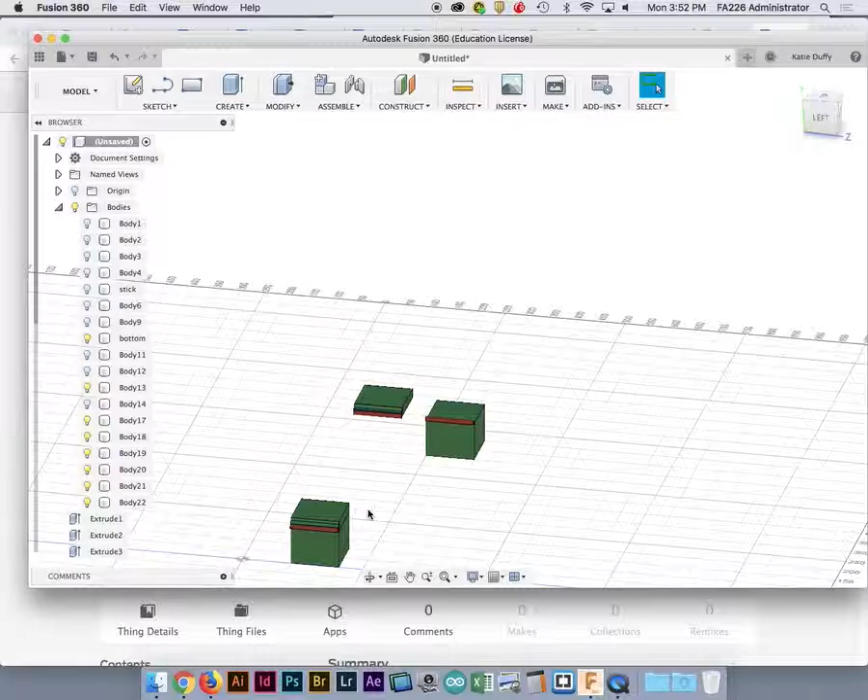For the top part, I only want a little middle section, so we're just going to make a joint that sits in the center here. I'm going to first hide the bottom and just focus on this. So I'm going to make a box.

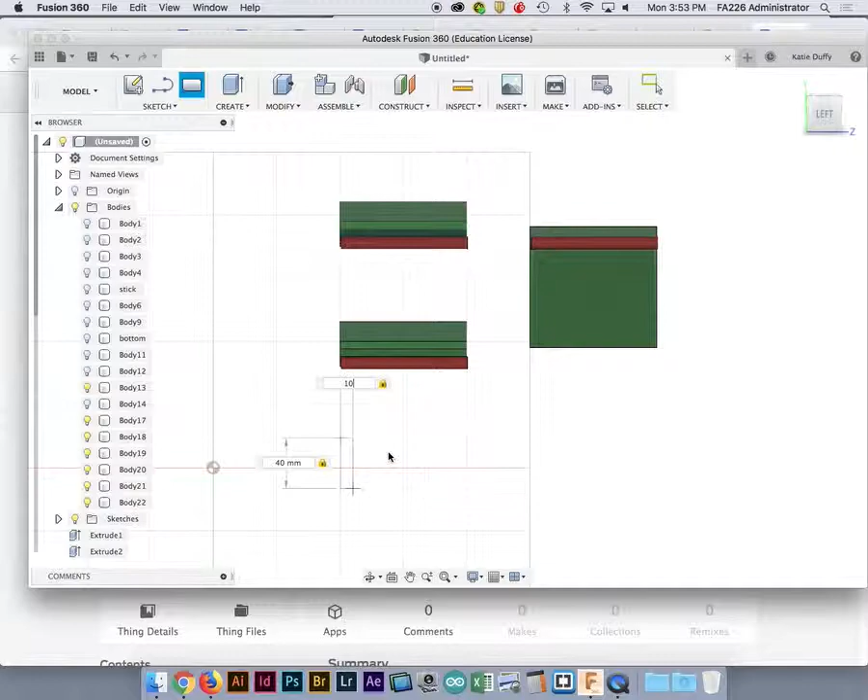I'm going to make it, let's say, 10 millimeters. So that joint is going to be 10 millimeters wide. We probably want to do like 40 height, and then 10 millimeters wide — let's do a little more than that. No, that's too much. 30? Yeah, okay.

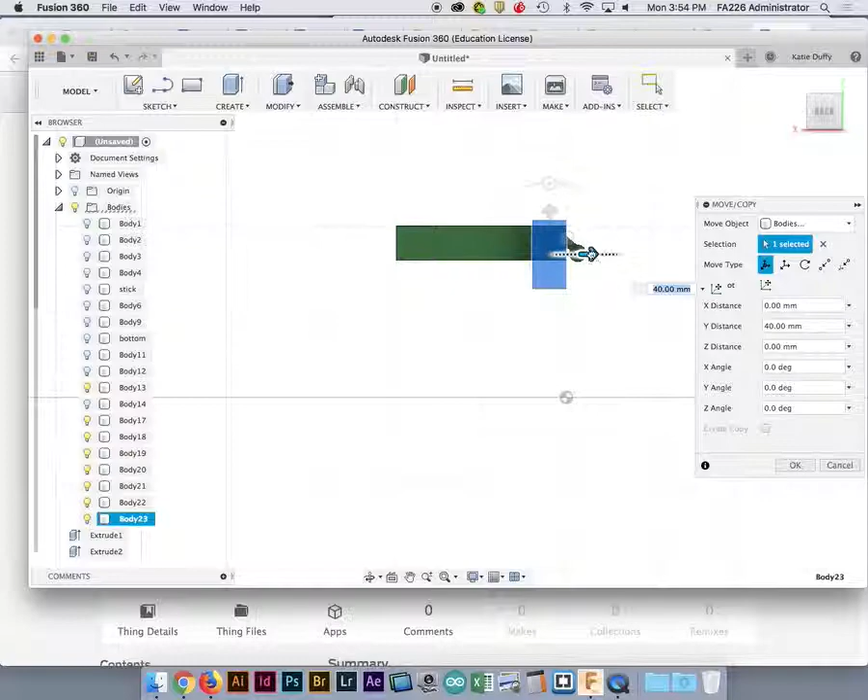Okay, and then I'm gonna make it big enough to fit from the edge here on the other side of my joint. So I'm gonna move this around here, then move it right to the edge. Zoom in. Okay, perfect. And then I'll swing around the back.

I'm gonna put it to about the center. Now I would obviously highly recommend you use your alignment tools. This looks pretty good.

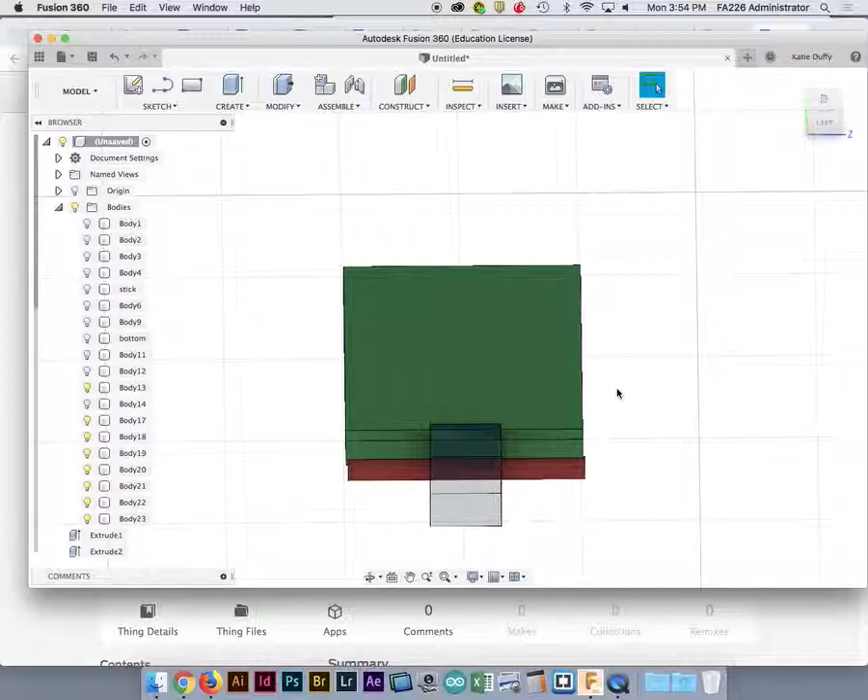So what I'm gonna do here, I have a couple options. I can punch a hole out of this one — yeah, we'll go ahead and punch a hole out of this one for now. And then what we're gonna do is use this one as a cutting tool for the bottom, so that will allow us to have the opposite parts.

So I'm gonna come here and again just do my combine. I'll select my target body and then select my tool body. I'm gonna keep the tool because I wanna use this again in just a little bit. I'll click OK. And I should have—oops.

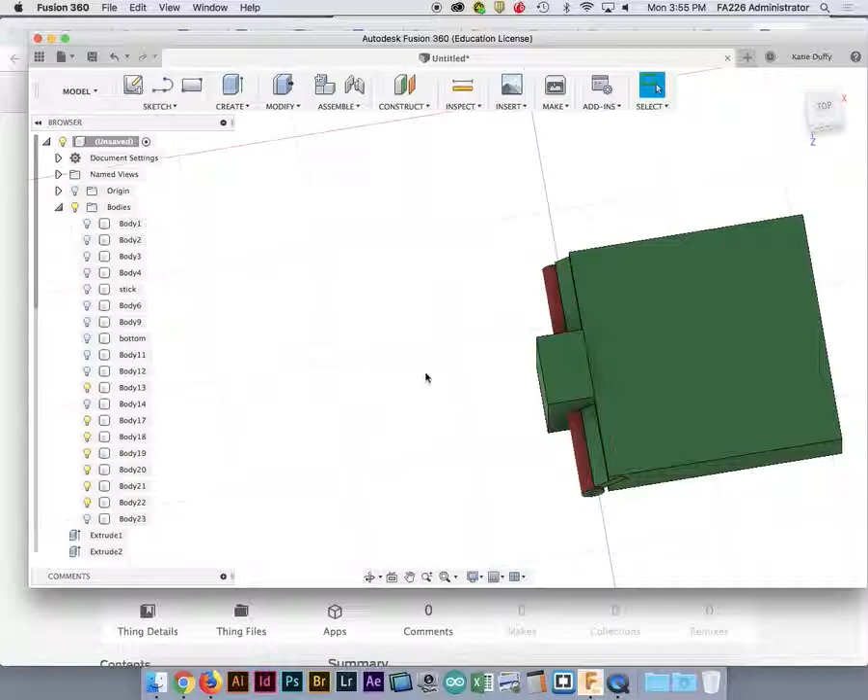Well, shit. So pay more attention than I am and do cut. I'm gonna select this one. Did I not go back far enough? Yes, okay, there we go. So let's try this one more time, make sure it's cut. It's a really easy mistake to make, but I do it a lot.

Okay, so we're gonna cut this out. I'm gonna keep the tool body because I kind of wanna make these joints on this side a bit smaller. So I'm gonna keep these, cut that out, and then use this one more time to make these joints a bit smaller. Or, you know, we'll do that next.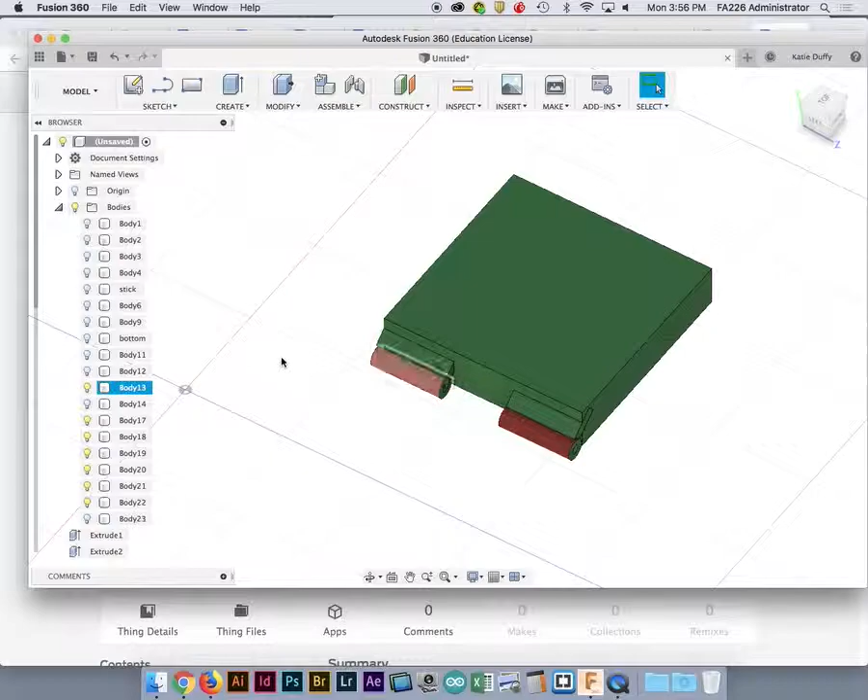So I'll hide this and turn on the bottom. Now what I'm gonna do is use this whole top as the cutting tool for my bottom.

So I'll head over here, and this is where it gets a little magical. Y'all excited? Great, thank you for your enthusiasm.

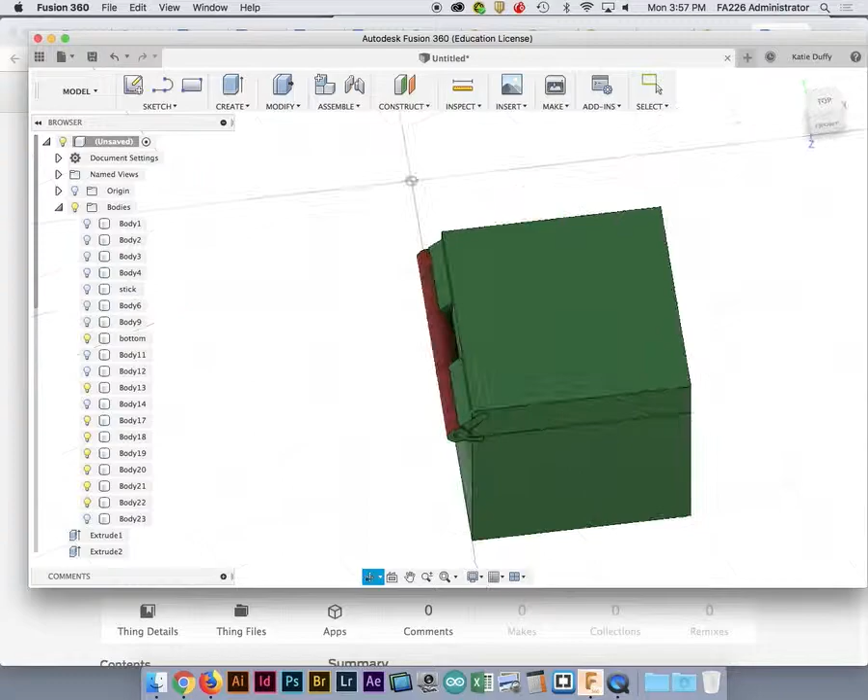I appreciate y'all. Okay, so I'm gonna select the body that I want to cut, which is the bottom, and I'll select the tool body, which is the top. I'm gonna make sure that it's a cut, and I'm gonna make sure I say keep tools because I don't wanna delete the top. So check it out — now I'm gonna be able to use this as the cutting tool. I'll click OK. And so then I have the bottom.

Let me show you the top. So here's my top — let me rename this. Okay, so here's the rest of this. Make sense?

Now, oh, you know what? I forgot one little part here. I forgot to punch out that middle part — you see that? And so there's a couple different ways that I can fix this. See this little weird part here?

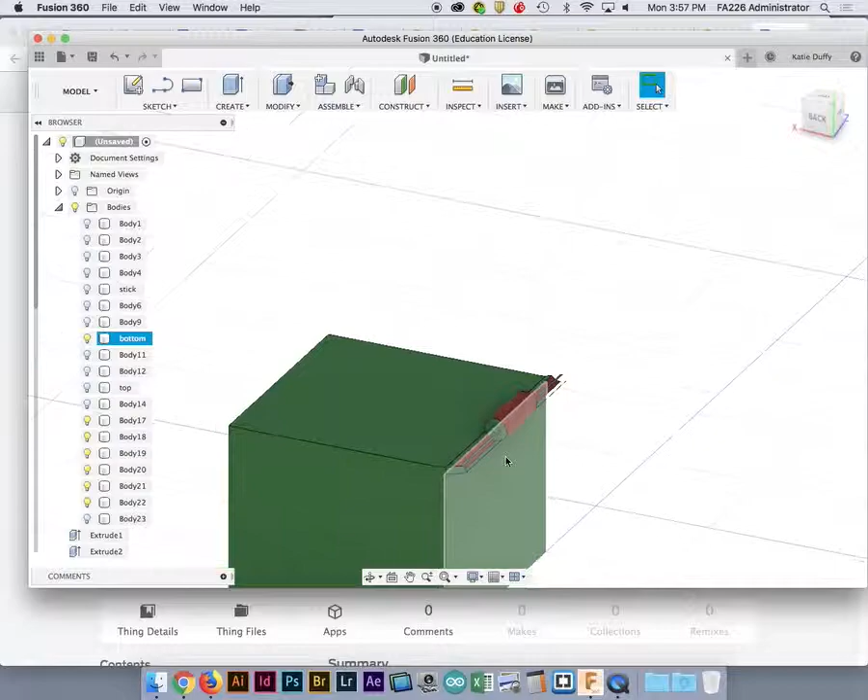There's a couple different things I can do to clean that up, but because I was whizzing through this, I forgot that we had a bit of an overlap with this one here. Y'all following me? Okay, so it punched out a little bit of this. There's a bunch of different ways to clean that up, but I'm just gonna leave it for now, for the sake of time. But y'all understand the overall process of this, right?

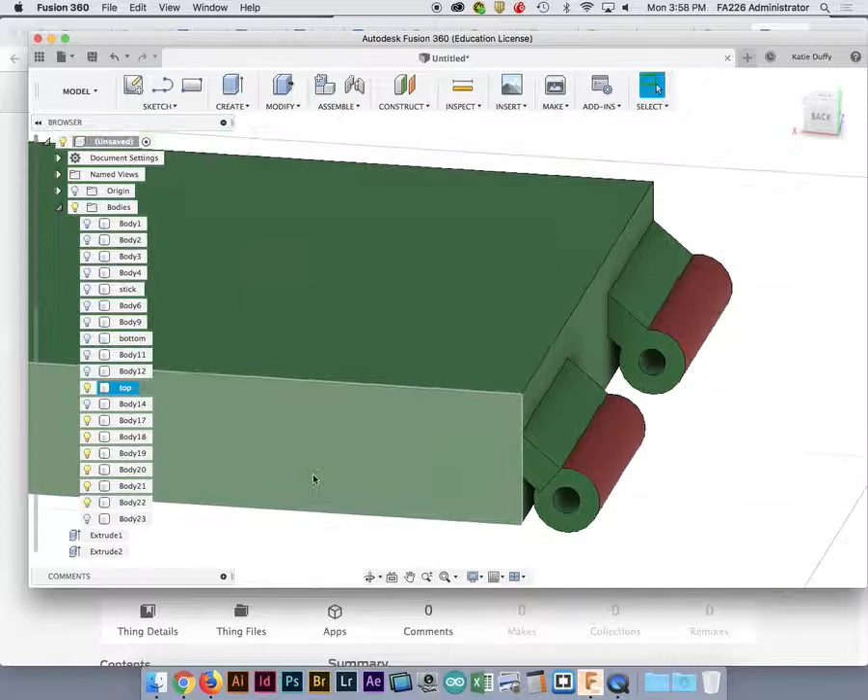Because I have this one, which is the opposite of my top. See that? Okay, and then what you'll do is, because this hole is 4 millimeters, you'll print a stick that is 3 millimeters and put it through these here, and that's what will hold it together. Does that make sense? Any questions about that?

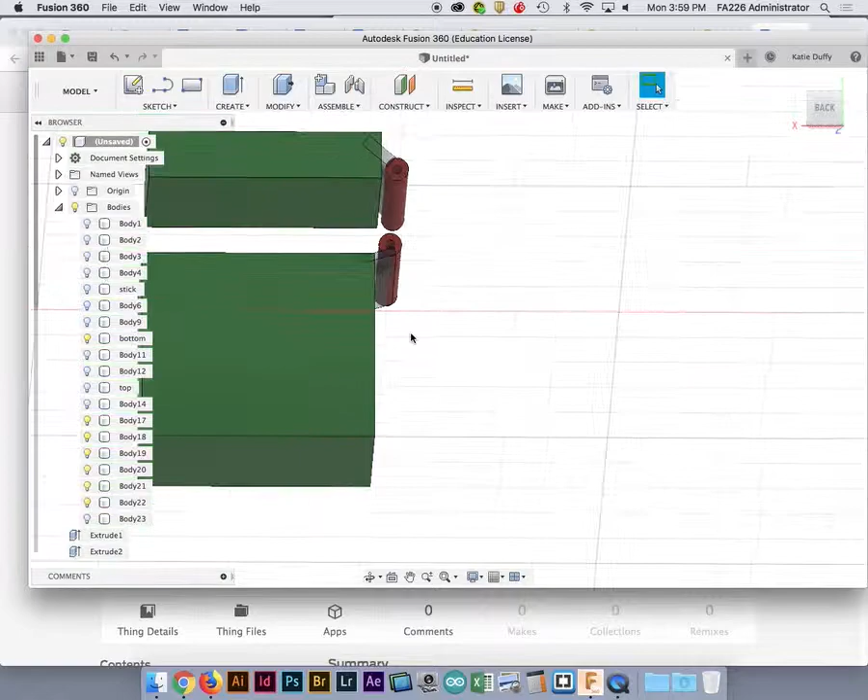Okay, one other thing I want to highlight. I made a mistake, I forgot to get rid of something I knew was going to be a problem. It's not a problem because I copied it over here, so I can fix it. The problem is this piece extends outside this boundary - it goes kind of inside and extends outside. So I'll make that change here, hide this, and make this a bit smaller.

Okay, so that takes care of the inside part. Now I just got to take care of that outside part. Maybe I'll rotate it a little bit. Let me zoom around this other way.

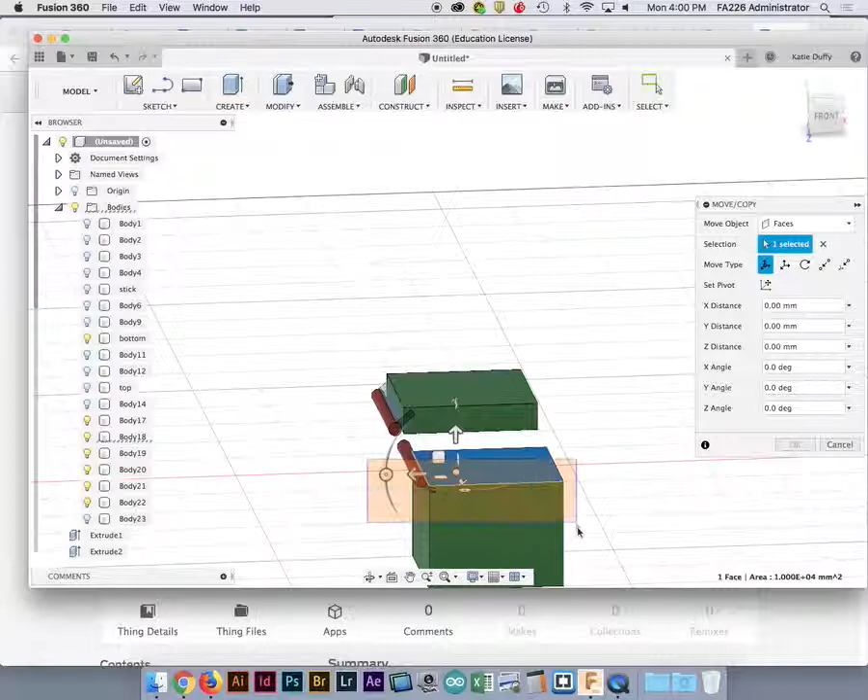Okay, cool, so now I've moved it so it totally perfectly intersects with this piece here. So what I can do to shore this up and show you how to fix your mistakes, which you will make, is make another copy of this, so that when I make a mistake I can go back and fix it. I'll make a copy of this.

All right, I'll go ahead and combine all this. So I want join to have everything. Let's make sure I have everything.

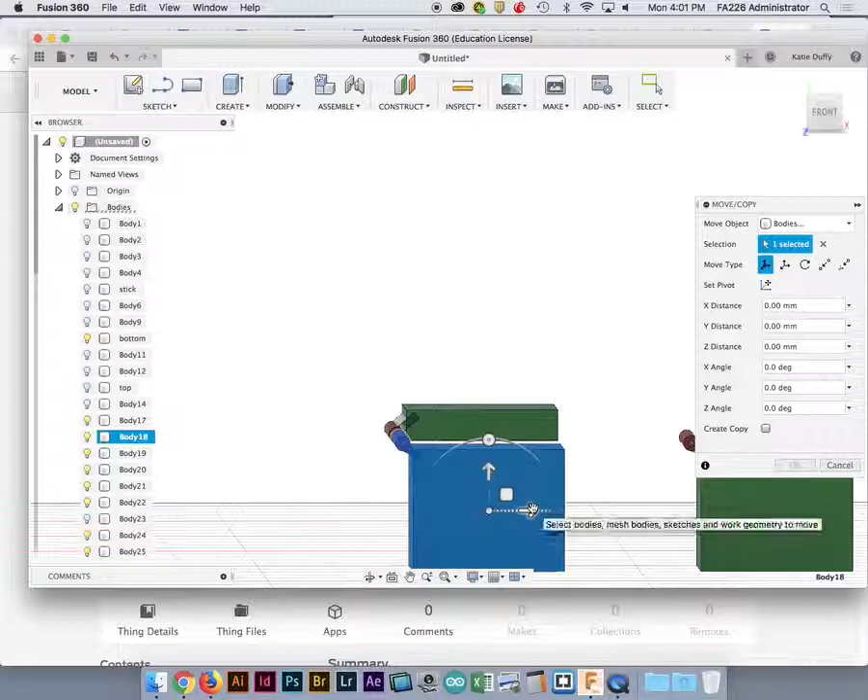Okay, and then I can move this one over to where the top that I've created is. Let me turn the top back on, and I'll hide the bottom, and try this one more time. So I can use my align tools, and then we'll be done with this, y'all. I'm tired of hearing myself talk too.

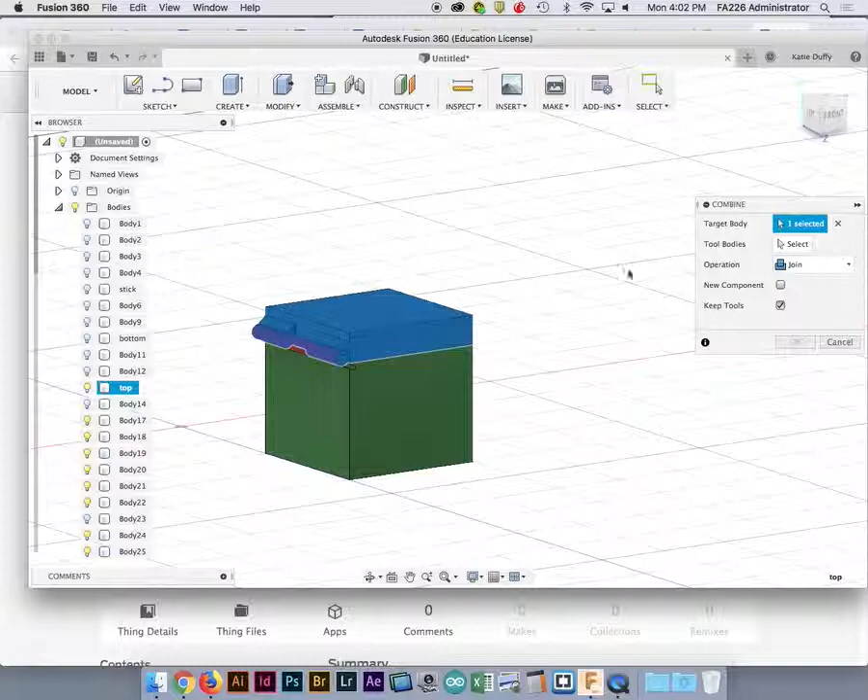Okay, so we'll go from this face, and we'll head on over to this face, so that aligns it perfectly. And then again we can use my top as the cutting tool. I'll say I want to use this one, and then my top's the cutting tool. I'll say cut, and keep the tools so that when I cut it - there we go, much better.

Okay, so that's what the bottom's gonna look like. And again, I still have some little wonkiness because I was being sloppy with the tutorial. This little part here, those little pieces are really easy to fix - if you have any little overhangs, I'm happy to show you how to fix those. But that's just because I was being lazy and didn't align things for the tutorial. Does that make sense?

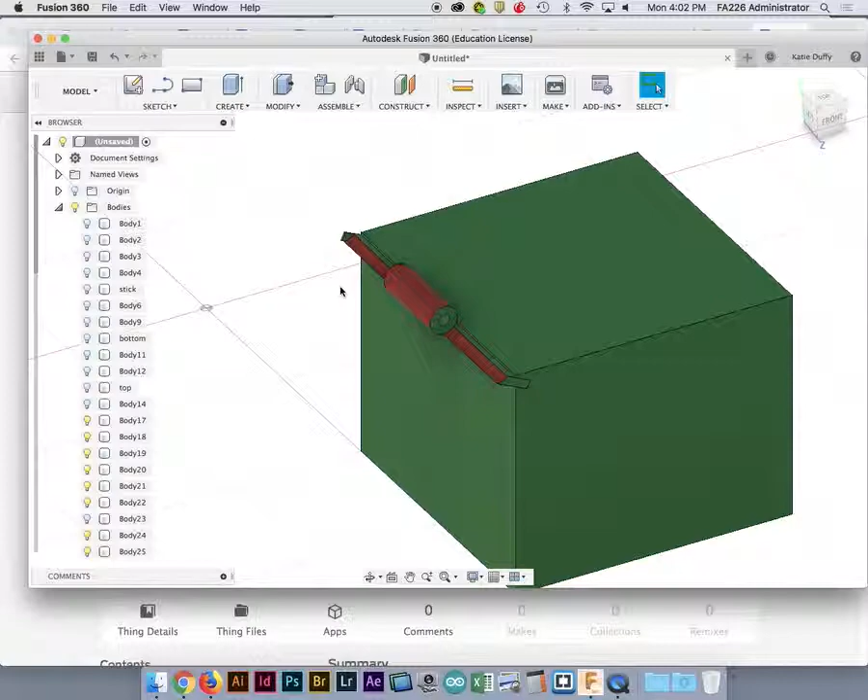There's one more step we have to take into account. If you want something to fit into something, how much bigger does that thing need to be? One millimeter, okay? So what I have to do on these sides, either on the bottom or the top, is make one of them 0.5 millimeters smaller on each side, so then that whole piece will be 1 millimeter smaller.

Okay, so the way I can do that is I'll select this and do my press pull. I'm gonna head over here, and I'll say negative 0.5 - just gonna suck it in 0.5 millimeters that way, and then I'll go on this side and do the same thing.

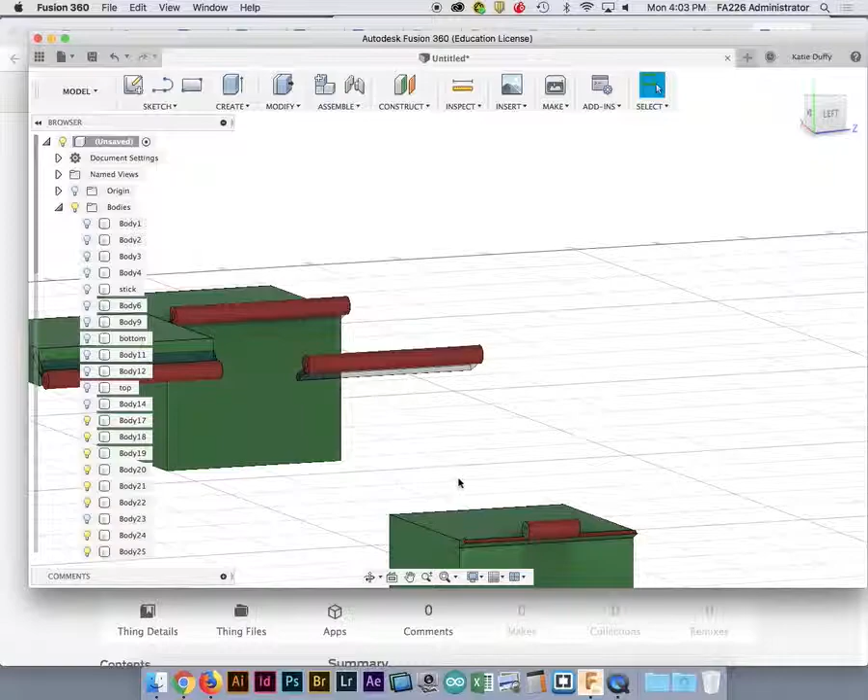Okay, this is a really, really important part. Otherwise your parts won't fit together - they'll be the exact same size and you won't be able to fit them inside of each other. So I'll do press pull, and check it out - the computer is so smart, it remembers exactly what you just did, so it automatically puts that negative on there for you.

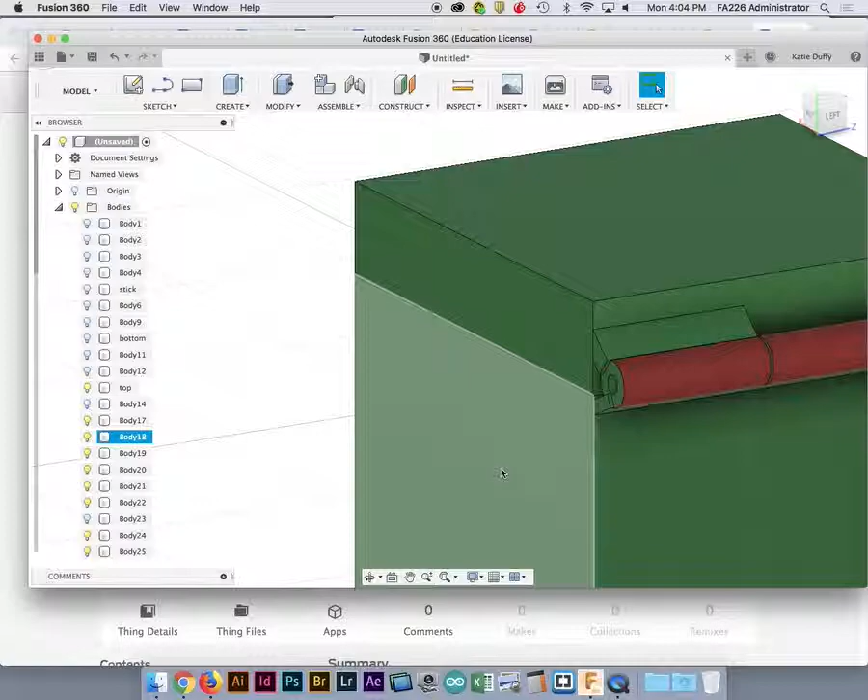So then when I turn on the top again, you should have a tiny little gap there - that gives you a little wiggle room to fit those two things inside. And then you'll print that stick, or find something that's 3 millimeters, a screw, whatever you want. You can print little caps to go on the edge of that stick that have a hole that's 4 millimeters, and just glue them on the side. So there's a bunch of different things you can do. Does that make sense to everybody?

Are we confused about any of this? Okay, so this is the simplest one you can do. There's more advanced ones - you can go ahead and play with the examples, but I think this one will get you pretty far. Any questions at all?